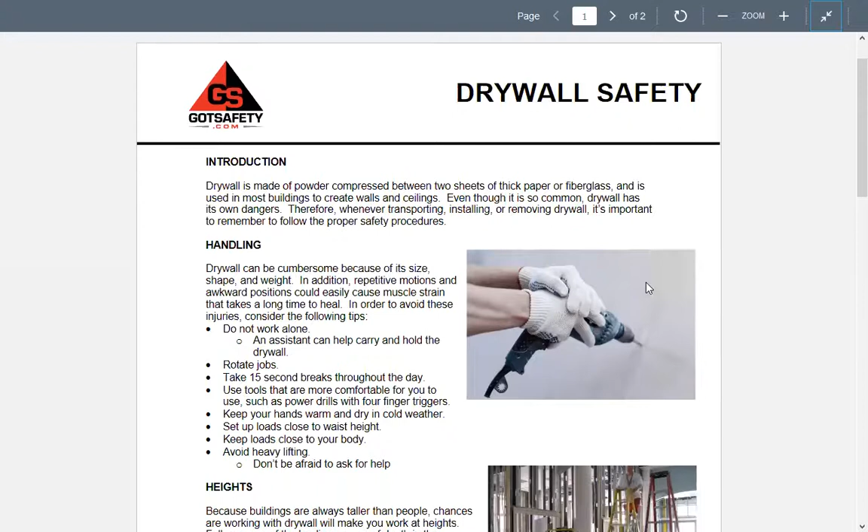Handling. Drywall can be cumbersome because of its size, shape, and weight. In addition, repetitive motions and awkward positions could easily cause muscle strain that takes a long time to heal. In order to avoid these injuries, consider the following tips. Do not work alone. An assistant can help carry and hold the drywall. Rotate jobs. Take 15-second breaks throughout the day. Use tools that are more comfortable for you to use, such as power drills with 4-finger triggers.

Keep your hands warm and dry in cold weather. Set up loads close to waist height. Keep loads close to your body. Avoid heavy lifting. Don't be afraid to ask for help. Oh, you know what? I need my. Oh, maybe I don't. Okay, good one. Thank you. I'm going to go back over some of this stuff in a minute once we get through it.

So, Catherine, would you? I'm just going down the list here in case you're wondering how I'm choosing people, and I'm skipping Jose for now. Circle back to Jose. Catherine, would you read, please?

Heights. Because buildings are always taller than people, chances are working with drywall will make you work at heights. Falls are one of the leading causes of death in the construction industry, so be sure to always be on your guard when working at heights. Properly use ladders, use appropriate scaffolding, and do not do anything foolish because you think it will save time. Don't be a fool. And Jose Landeros, would you read us dust, please?

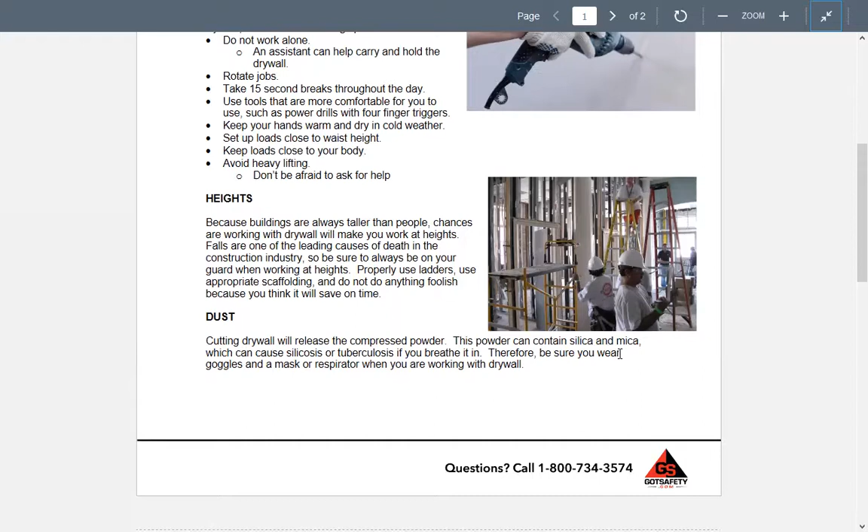Cutting drywall will release compressed powder. This powder can contain silica and mica, which can cause silicosis or tuberculosis if you breathe it in. Therefore, be sure to wear goggles and a mask, a respirator, when you are working with drywall. Okay, so wow. Silicosis or tuberculosis, not good things.

General tips, please. Colby, are you here? Yeah, you're here. Colby.

Cutting safety. Be sure all cutting tools are in good condition and properly sharpened. Dull blades require excessive force, cause sloppiness, and can slip and cause an accident.

Electricity. Electric wires and electrical boxes can be hidden, which poses the chance of electrocution to drywall installers. Be sure power tools are properly grounded. Assume all electrical wires are live wires. Do not use aluminum ladders near electrical wires.

Do not wear watches, rings, or other metallic objects, which could act as a conductor of electricity around the electrical circuits. Housekeeping. Keep walkways and workspaces clear. Keep the floors dry and work with good lighting to prevent accidents.

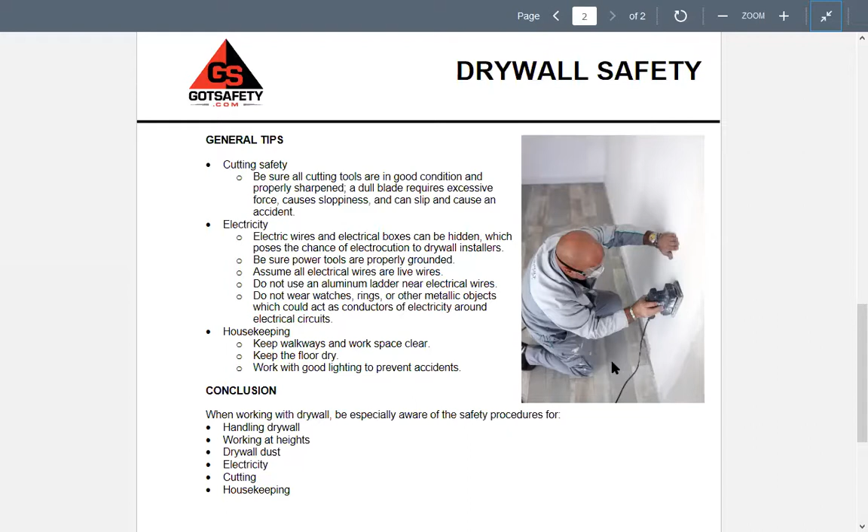Michael Silva, would you read the conclusion, please? When working with drywall, be especially aware of the safety procedures for handling drywall, working at heights, drywall dust, electricity, cutting, and housekeeping. Okay. So, does anyone want to say anything about drywall?

I do, that's for sure. Let's see here. How much does a sheet of 4 by 12 by 5/8 drywall weigh? 70 pounds, huh? All right. 70 pounds. So drywall is pretty universal these days, at least in the United States.

Now, I really don't know how interior finishes are done in the rest of the world. I don't know if there's more plaster or more unfinished walls. We talked about this yesterday in a Zoom meeting with another class I'm teaching for back to work, because we have some people from different countries, like one person from Peru. In Peru, their building techniques are a little different than ours, as well as in Mexico and different countries.

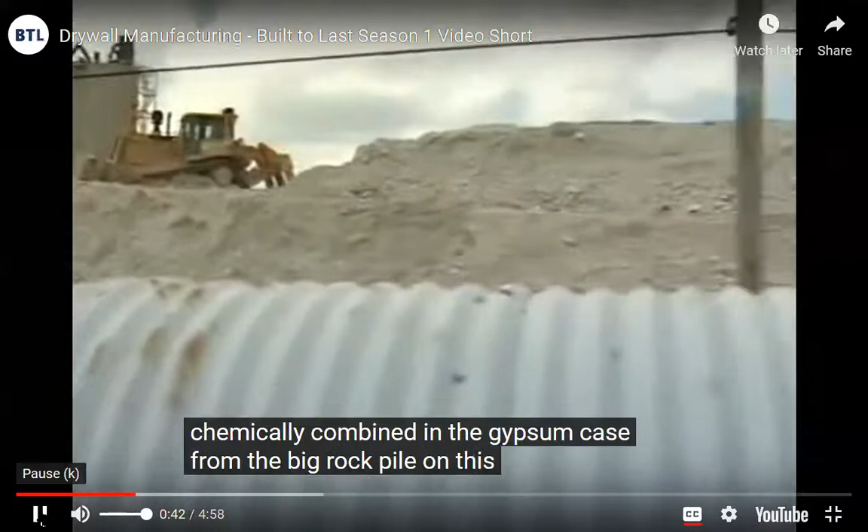And at this point in the process, we have a bulldozer, and he's blending the two to give us a good mix. So we're taking it by this conveyor to the rock dryer to dry off the free water, which is water that's not chemically combined in the gypsum. So it goes from the big rock pile on this conveyor belt. It gets all combined, and eventually it's going to be drywall. Yes.

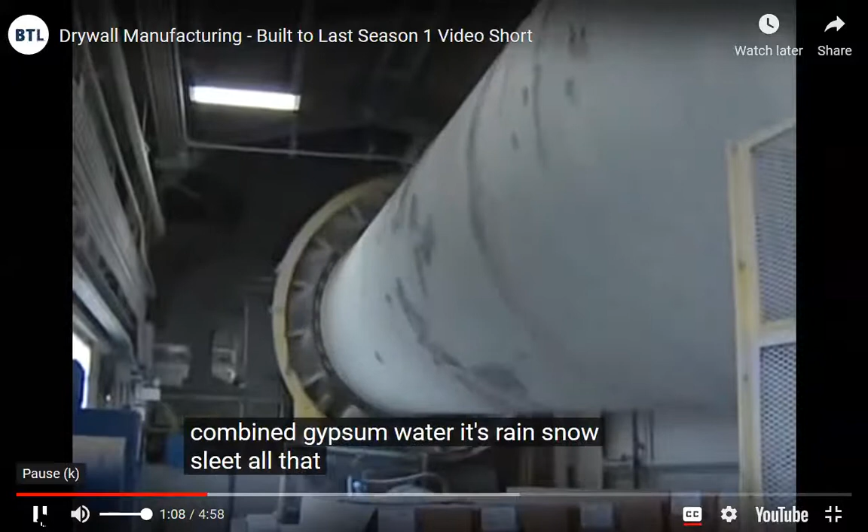Okay, the mixture that the bulldozer just mixed, the synthetic and natural rock, is going into this building. From here, we're going to screen it. We're going to run it through an impactor for the coarse particles to get down to size. And we're also drying it. We're shooting it through a flame to dry off all the free water, which isn't part of the chemically combined gypsum water. It's rain, snow, sleet, all that other stuff. Okay, so the object here is to get it as dry as possible then.

Yes, it is. Okay. The rock dryer is taking away the free water, which is rain, snow, sleet, and we're left with gypsum. Bring it into the plant here, and there we're going to grind it, and we're going to calcine it. That chemically combined water, we're going to take out 75% of it in the middle. From there, it's called stucco.

Now I'm interested in these big spools back here. What's all this material? This is the other main ingredient of wallboard, which is paper. All of our paper is 100% recycled. And these big rolls, we're going to take the stucco, shoot it in between two sheets of these big rolls of paper, and that's the next step that we're going.

Okay, now how come some of them are different? I see green, tan, and purple. That's all the different products. In this plant here, we make every product in the company, which is XP product, which is mold resistant, your regular wallboard for residential, your 5/8, which is for commercial construction, and that's just a different type of products. This is why the paper is different colors.

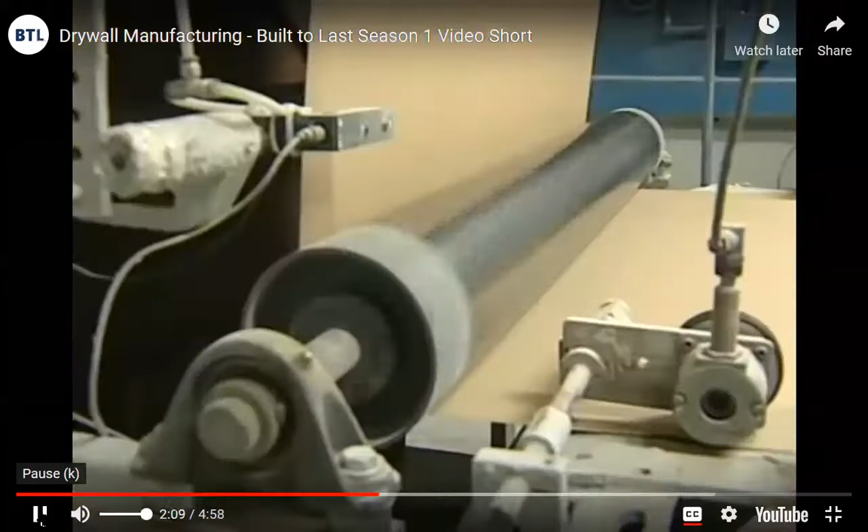Steve, I see a lot of drywall going by up here. So what's happening in this part of the plant? This is where we form the sheet. We take the stucco that you saw in the rock get ground down in the chemically combined water. From here, we're adding water to it, shooting it in between two sheets of paper, and then we're rehydrating the gypsum back in this sheet long enough to go to the knife where it's hard enough to cut.

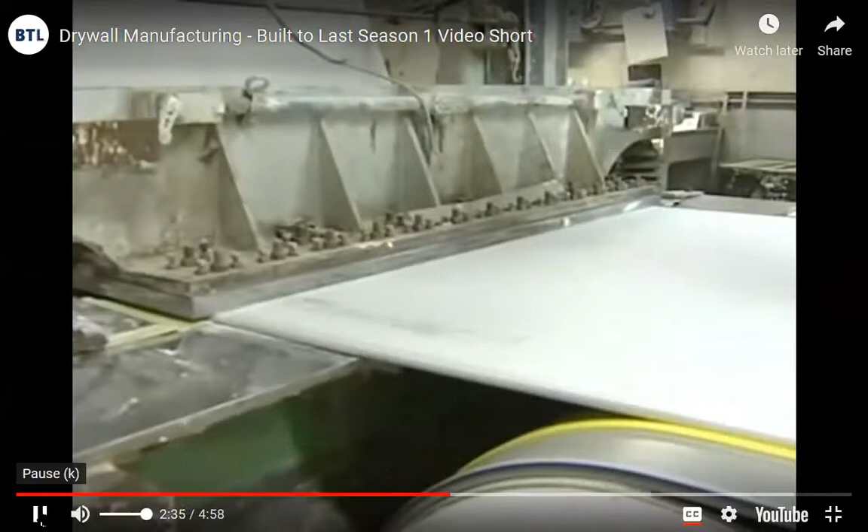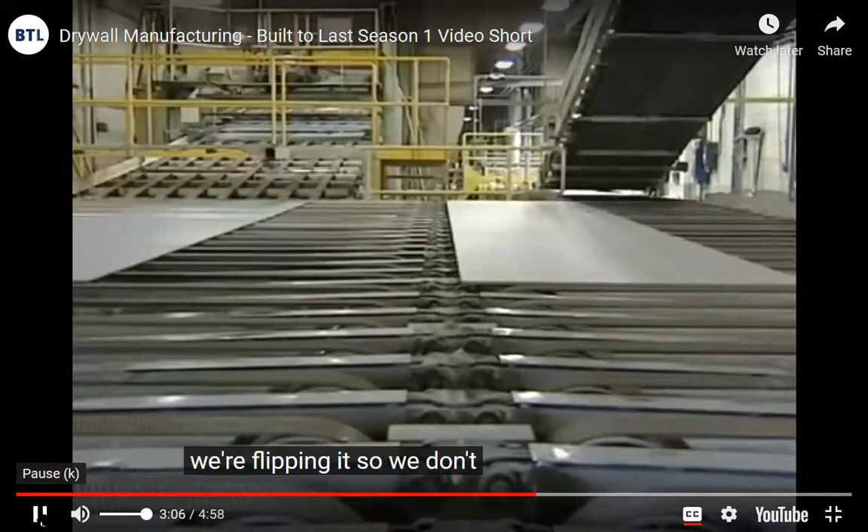Real active area in the plant. So what's happening here? This is the knife area. What we're doing is we're cutting that sheet that we formed at the wet end. It's 800 feet long. We're cutting it to length. We're flipping it so we don't damage the face in the kiln. We're grouping it side by side and loading the kiln so that we can dry the board in the kiln.

Okay, about how many degrees is that kiln? It's pretty warm in here. It's 3 zones, and it's about 550, 550, and then 350. How long does that process take for it to get through the kiln? From the wet end through the kiln is about 50 minutes. Cool.

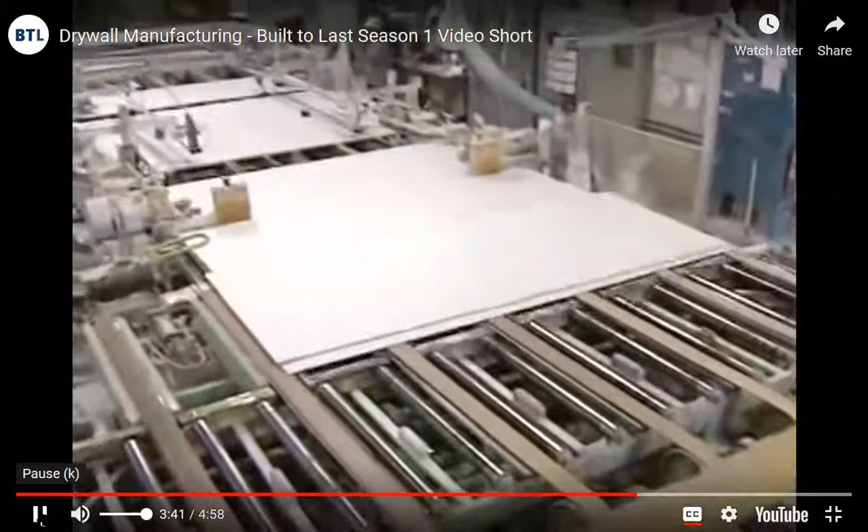And then about this location of the plant, we finish cut it, we bundle it, we put tape on it for our customer, and then we stack it in the warehouse.

So Steve, this looks like your warehouse, huh? Yes, this is where we stock our board after we make it for our customer. We have 5/8 Calcor over here, which is a plaster-based product, shaft wall liner there, regular half-inch wallboards right in behind us for our residential customers. So all of those different variations that you told me about, that coincides with the different colors. Yes, that way the customer and the architect know exactly what they expect for the job is on the wall

by the various colors. I'm glad that you talked about that because it seems with all these different varieties that you have in drywall, you can cover pretty much any need for residential and commercial use. Yes, we ship our half-inch and our 5/8 locally, and then some of the products, we're only one of a handful of plants in the country that run it, so we ship those nationally. Okay, and so from here, it gets loaded onto a truck and gets sent out wherever it needs to go. Yes, that's correct.

Okay, great. Well, thank you so much for the tour today, Steve. It was really interesting. You're welcome. Wow. Wow, wow.

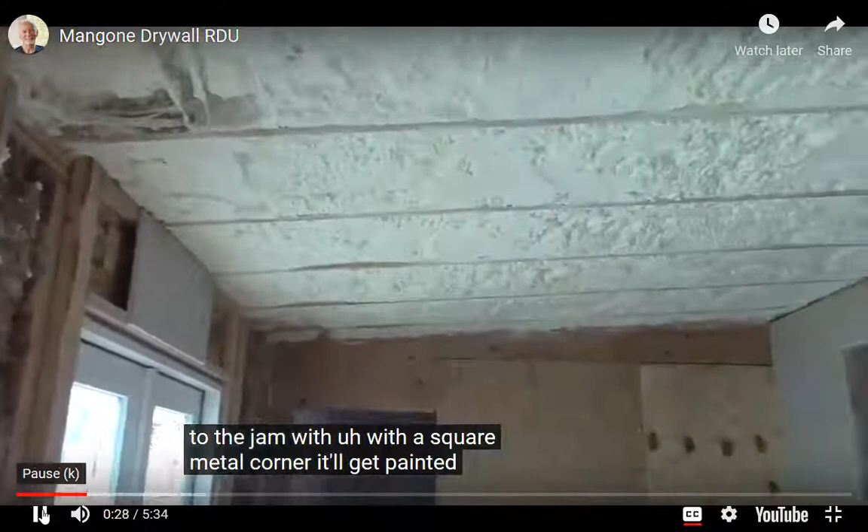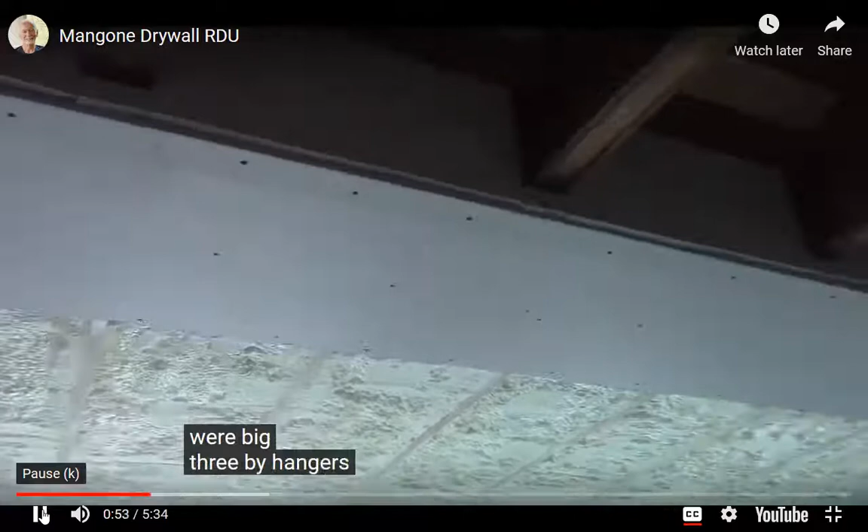There's a soffited ductwork, which you may or may not have seen. It really came out good, and we were able to extend that soffit, that box. Sorry about the noise. So that it completely covered the hangers. These were big 3x hangers that hung on these trusses, because this was the exterior wall, which we removed, put in a big parallam beam, which these site-built trusses are hanging off of, and we were able to box them, pad out, and get rid of the hangers altogether.

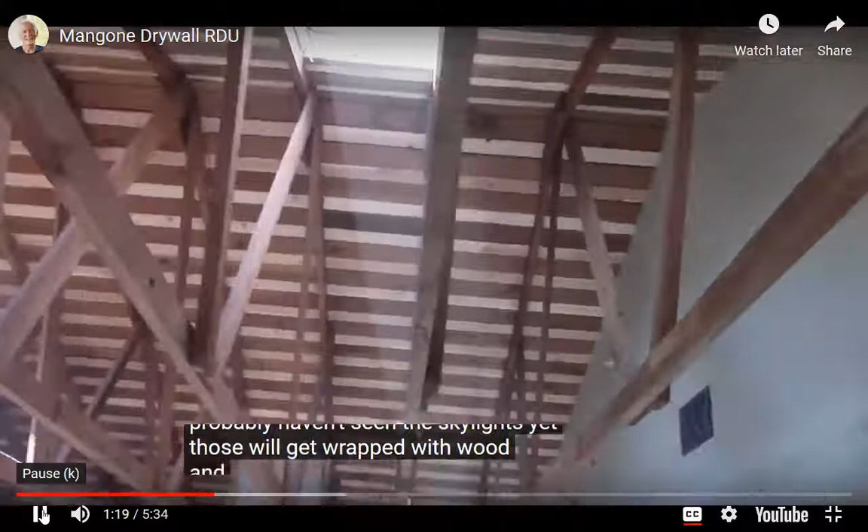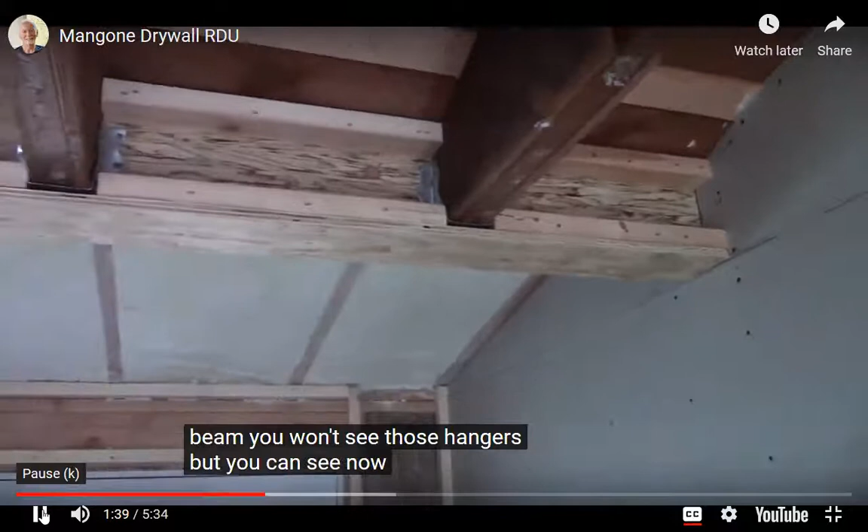Probably haven't seen the skylights yet. Those will get wrapped with wood and cover the 3.5 inches of insulation. These are all drywall, all hung. This has also been padded out to receive drywall to get past the hangers. Get your finger out of there. Drywall beam. You won't see those hangers. You can see now. See those hangers? None of that's going to show. Not one bit of it.

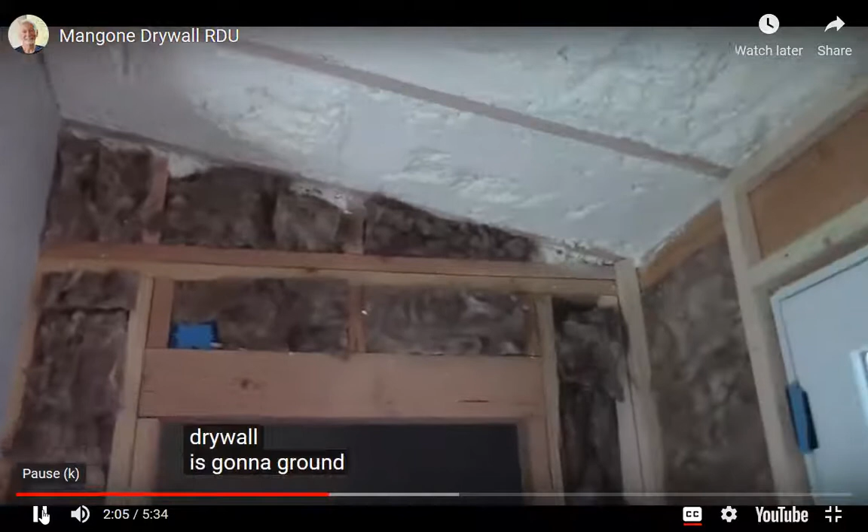This wall is furred out, so we have enough room for the drywall to return into the doors. And we're not hanging the walls with doors on them yet, because we need to get the jambs in, because the drywall is going to ground to the jamb. It's going to return to the jamb with a square corner.

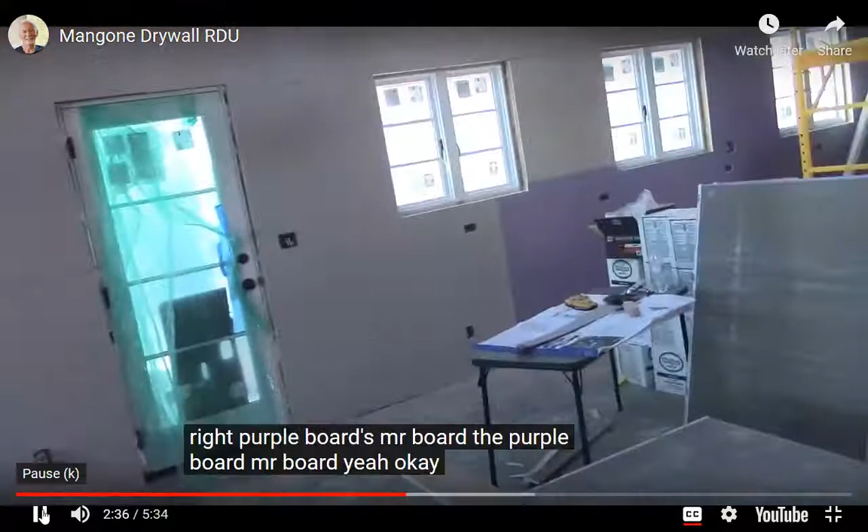The purple board is the MR board. That's moisture resistant. Right? Purple board's MR board? Yeah. Okay. It's nice to have on a kitchen wall, your wet walls, your bathroom walls, anything that's a wet wall. So this got furred out, like I said, so we can do that return. This is a wrapped opening.

Typical drywaller's bench. They're not hanging this wall yet because... no, there's no reason not to hang this wall. Yeah, they'll hang this wall. And they'll hang this ceiling too. Now, these guys are in hanging mode. Yeah, what the heck, man? Get to planning. Cause the door's in the corner and then the oven's sticking out, so. Okay, and you know that's a wrapped opening, right? Yeah.

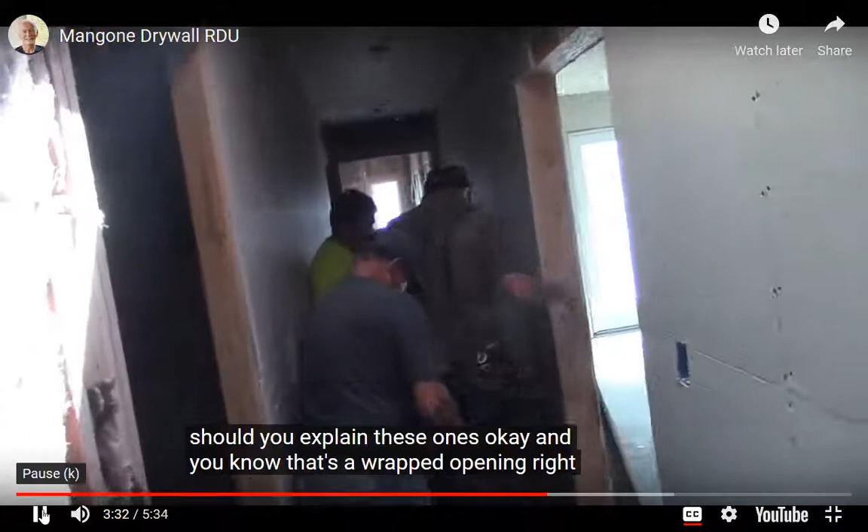There's the edge of it. This is going to have nail-on metal corners. It'll be a nice square corner detail everywhere. Gotta get the jambs in these places. Okay, let's go to the bedroom.

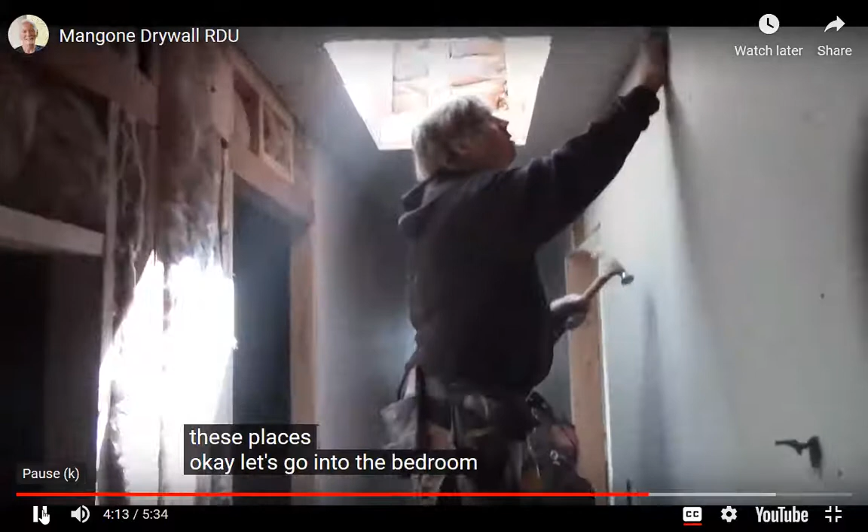Yeah, I tried to do it. What are you doing? He's a movie star. I know he is. No, you guys are the movie stars. You guys are the movie stars.

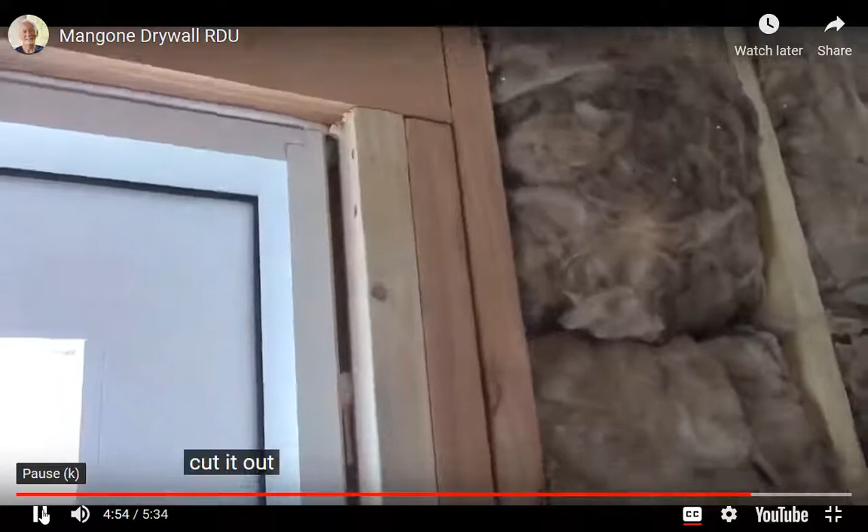All these openings are padded out. Padded out so the drywall will go here and we turn here. Nice square corner. Nice, huh? Very nice. Okay, now I'm not sure what's going on here. I'm gonna ask John about that. Okay, well, there you go. Drywall being hung. And I'll interview Rob Thayer, the drywall guy, so he can talk a little bit about it.

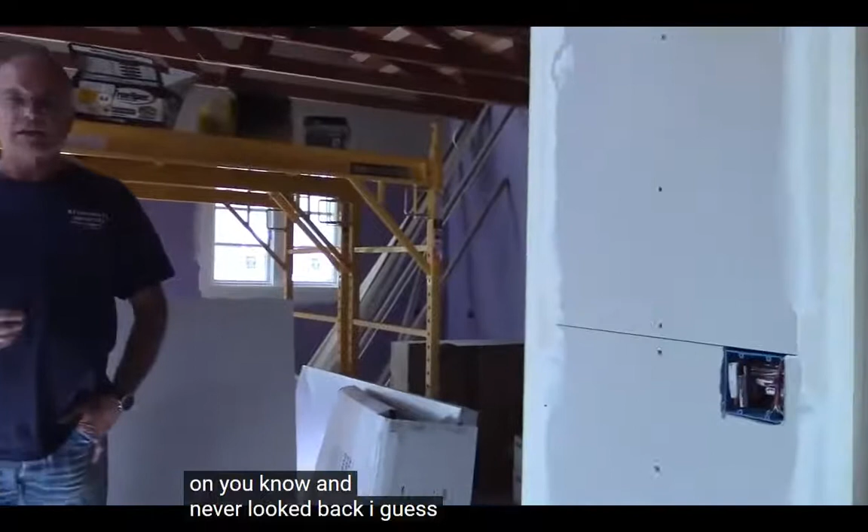I'm one of those guys. I went to college, graduated, came out, discovered I could probably make more money putting my tools back on, and never looked back, I guess. I've been in town since 1979. Seen quite a bit of ups and downs in this town, and that brings us to today. Rob, did you get into hanging drywall purely because it's what your family did? It was kind of a family thing?

No, it developed. My dad wanted to teach his boys a trade. He wanted us to go to college. All three of us did. The reason he wanted us to have a trade is something to fall back on. It's something you always knew, especially me as a kid, and it was the easiest job to go get while waiting for other opportunities, and pretty soon you're just involved in it. It took almost a decade for me to accept that that's actually what I was going to do.

As opposed to using my education, applying yourself and trying to get something else, white collar versus blue collar, and individually learning that being in the trades was more satisfying than I think any other job would have been. Being outside, physical work, the feeling of accomplishment because you get to see what you do at least once a week, if not every day.

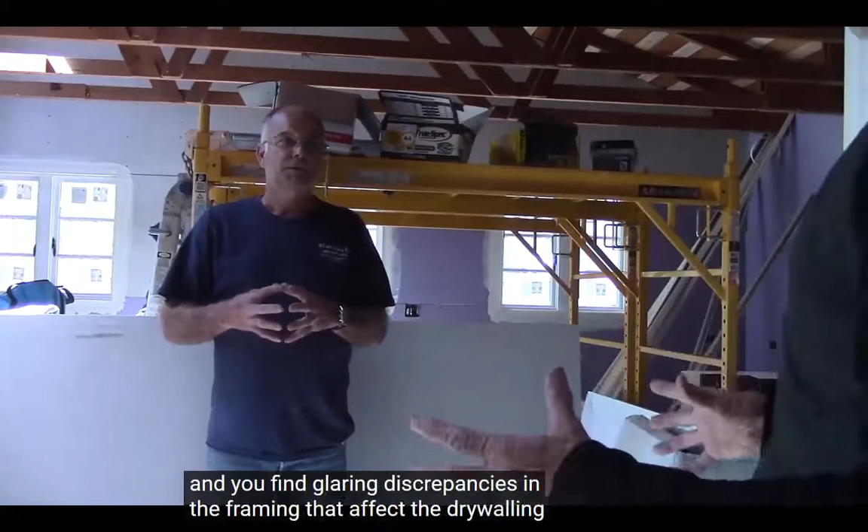It's kind of a rabbit hole to go down, because it's like, who do you keep passing it on to? Okay. Right. So somebody along the way has to be policing the job to ensure the next guy in, and then those tolerances and limits have to be established. Or yeah, and it seems to me that if you're doing the job the way it's intended for you to do it, and you find glaring discrepancies in the framing that affect the drywall, it's time to alert whoever's in charge of general, and let's work together and get

this fixed. But also, I'm willing to do a little bit, but I'm not willing to spend a bunch of money because I bid it for X. I'm doing it at a fixed price. Right? From a subcontractor, yeah, absolutely. And it's only fair. There's nothing unfair about it. Right. Because we're working with, like you said, wood that's imperfect. Well, the assumption is that the trades before you did everything they were supposed to do.

Even us, good example, raw door jamb, maybe we leave the job, drywall's sticking an inch past. Well, we don't expect someone to cut that off. We should do that. But occasionally it happens. So if the door guy does it, no harm done. But if we're doing it constantly and that's kind of our MO, that's something that we should be called on and forced to correct.

Well, when I started, everything was nailed. Everything. You had maybe a pocket door that, like my dad, we didn't have a screw gun, we had a Yankee. The old screw Yankee thing. Who even knows? Right. I'm going to stop the recording and show you guys the Yankee. None of you know what a Yankee drill is.

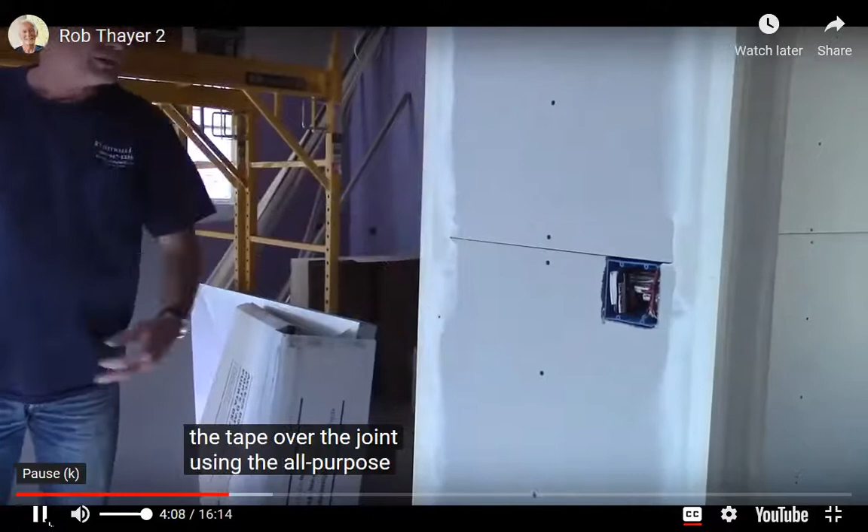There's a joint in the wall, and you embed the tape over the joint using the all-purpose. That needs to dry. So that's your first day, or the first step. And then generally, anytime you're doing any drywall work inside a house or a finished area, there's usually a minimum of 2 coats.

First coat, second coat. So that would be a first coat over the tape, and then a second coat over the first coat, and each coat goes a little bit further beyond and feathers the edge. Okay. So when you say feather the edge, I think what we're talking about on this particular joint is that tape's about 2 inches, right? Tape's 2 inches wide. So 2-inch mesh tape comes across this joint, and then the mud goes on it, and the mud goes on either side of it.

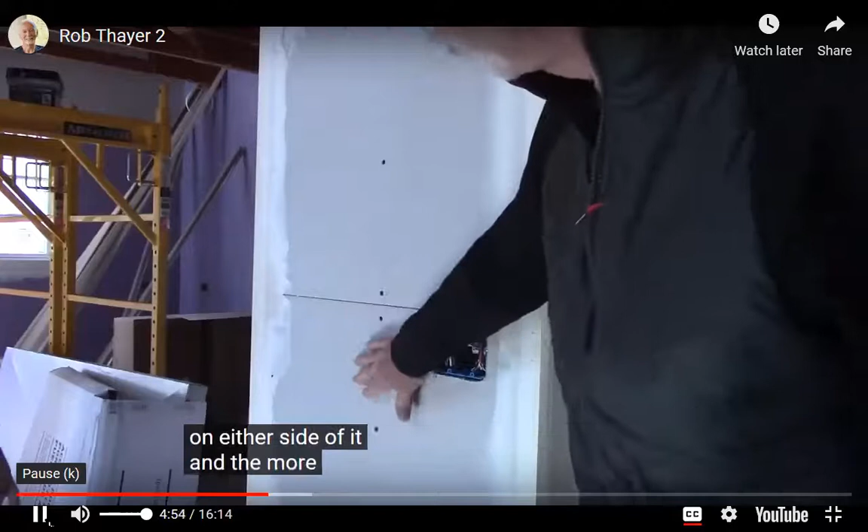And the more mud, so the sand in between. Yeah, okay, this is a good example. This is a recessed joint. By the way, stopping you right there, that's how drywall is made. Drywall is made on the edges, it flares in. So here's a piece. This is a 4x8 sheet, 1/4 inch. It comes from the factory like this.

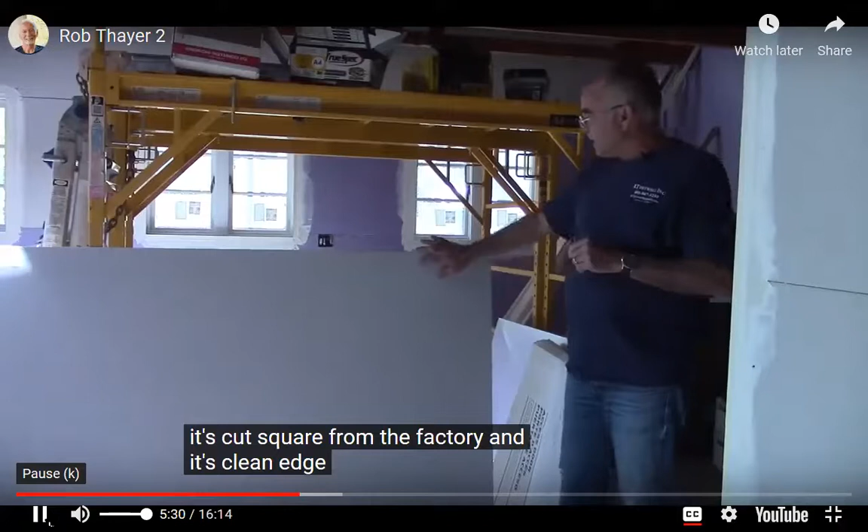So we call this a butt joint. It's a factory edge. We call this a factory butt joint. It's cut square from the factory, and it's a clean edge. Almost always the long edges, we call them recessed edges because there's a little recess here. So this is a 1/4 inch, and then there's a little recess, less than a 16th probably, but let's just call it a 16th. And this is wrapped in paper, and it's glued and sealed on the backside. So it narrows. So yes, and so that's what we have over here.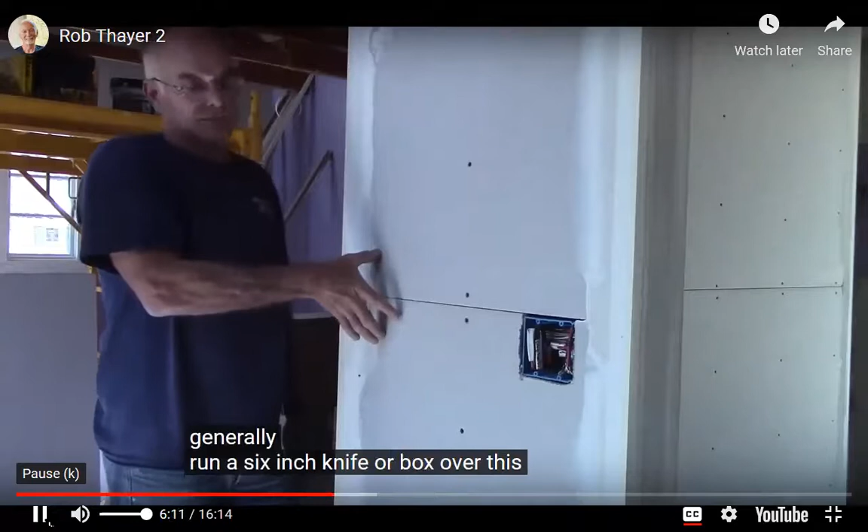So this is where the tape goes, and it's recessed so you can embed the tape and get close to this flat plane. Right. So after that's taped, next day after it dries, you would generally run a 6-inch knife or box over this. Feather the edges, see this edge here is feathered. Feathered so thin down. Yes, as tight as possible. Okay, that dries, that's the first coat. It'll need another coat, second coat, a little bigger knife, let's just say an 8-inch or a 10-inch knife. Again, to cover the 2 edges, feathered, and that's the second coat.

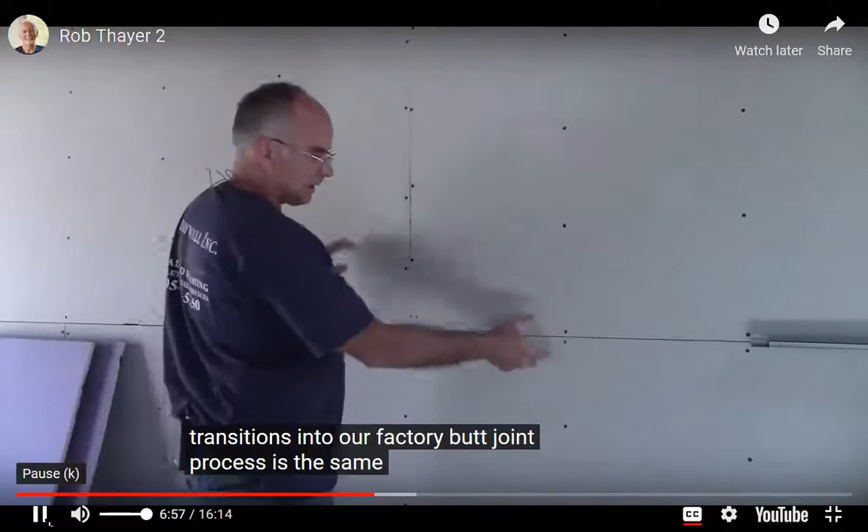Again, that dries. Now, aren't you mudding the nail holes in the first go around as well? Yeah, you want to spin and look at this wall? That's a much better wall. Okay, so here's our recessed joint, it transitions into our factory butt joint. Process is the same. The only difference is this joint has a recess, this joint has no recess. So how do you get that joint? We'll get there. Okay, so we've done 2 coats here. The same process is here, but a little bit different on the coating.

So since this is a butt joint, we do tape it the same. Okay, but your first 2 coats would be here and here to create the feathering on the side of the tape. And then we've created somewhat of a recess in the middle. Yeah, I didn't know that. That's first coat. Now the second coat obviously would be again here or here. So you're filling the middle and then you're going to hit the 2 sides. Yep. Okay, second coat. Now the same thing with the screws. You're going to first coat it. It's going to dry. Does that happen when you guys? Generally, it happens when you're first coating here, you're first coating here.

So the key for efficiency on taping is trying to keep the whole project in the same circular process. So you don't want to have second coat, first coat, finish coats all going on at the same time. You want to keep the process continuous. And I would imagine you want the absolute minimum amount of mud to do the job rather than more mud than you have to sand off. Yeah, because here's what we're going to get to now with the second coat. What a skilled tradesman will learn over time is how not to crown the joints. If you start crowning, that's where the shadowing in the house, the lighting will start showing, and they'll highlight right out, and you'll see little bumps, little crowns.

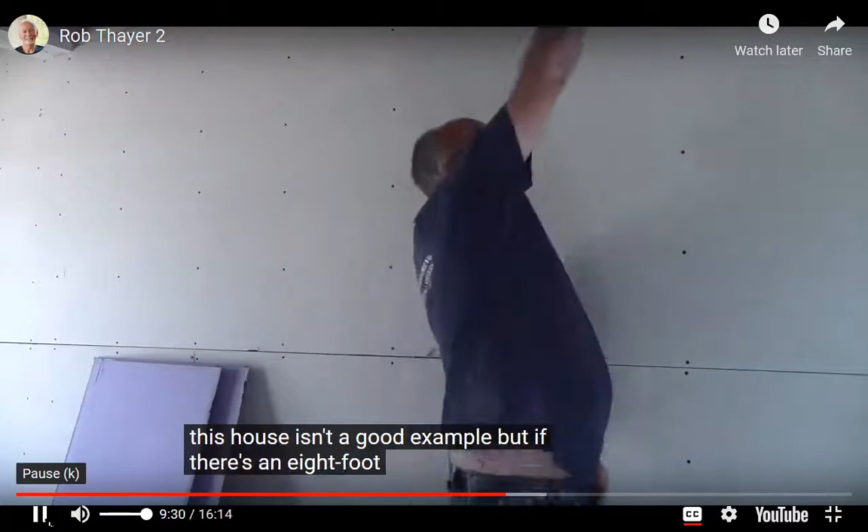We call it troweling out the joints. So that third day, you'd be troweling out the joints. You might be doing a little touch up, and this house isn't a good example, but if there's an 8-foot ceiling here, there's going to be an angle here. Now this angle, we have tools, we call them angle boxes. It gets hit when it's already taped, just like that, just like the embedment. And so generally we trowel out the butts and run the angles on that third day.

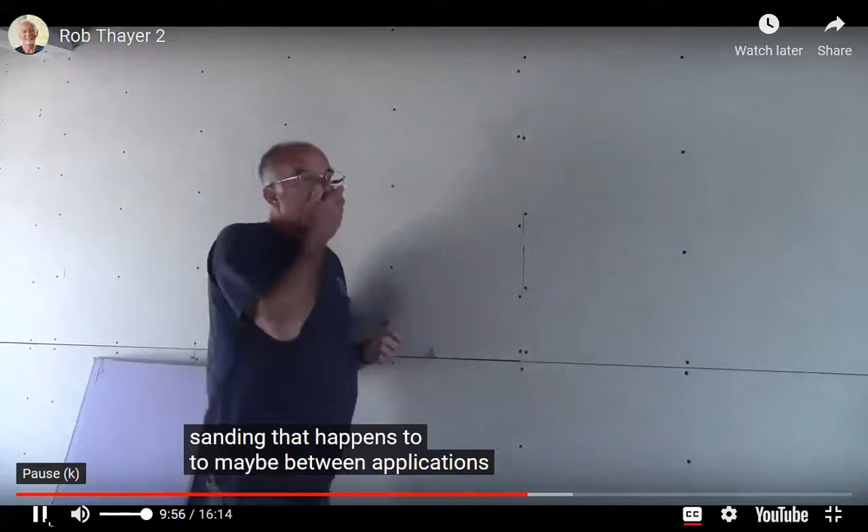Now, after that, it's all dry. There's some sanding that happens maybe. Do you sand in between applications? Well, you can. You don't have to, and that depends on the talent of the taper. Right. Because that's your whole goal over time with experience, to continually improve to where there's less and less sanding. Yeah, less and less work, less and less man hours of people touching the same part. Right. A good taper can get all the way to this process without any sanding.

There might be some brush down because you'll have foam boogers. There might be a little blob or something that needs to be knocked off. But generally, everything we use is sandable. So any mistake we make, you can sand it out. So the more you're limiting that, the more efficient you are. Okay. So there's generally some brushing down, sanding, just to take off some of the edges. And again, it depends on the finish texture.

Skip and smear. Skip and smear, there's hardly any sanding because the texture itself is so heavy, it almost looks in places like it's not sanded. So generally the lighter you go, the thinner the texture, the more sanding there is. So a glaze or a level 5. A level 5 is the ultimate smooth. We can get into textures if you want, but level 5 just means that all the surface area is skimmed with a thin layer of drywall compound. Okay. Level 5, that's Cadillac.

It's counterintuitive, but the smoother you go, the more work it takes because you have to take out all the imperfections. Even though we're starting smooth, you think, well, I don't have to do anything to that, but you do because the drywall mud itself has a different paint absorption than the paper. So you want to make one skin, so when the paint goes on, you don't get the phenomenon we call flashing. Everybody's done everything correct, but the paint acts a little different between mud and paper. So level 5, the theory is a complete skin of compound. It's all one surface, so everything should work the same.

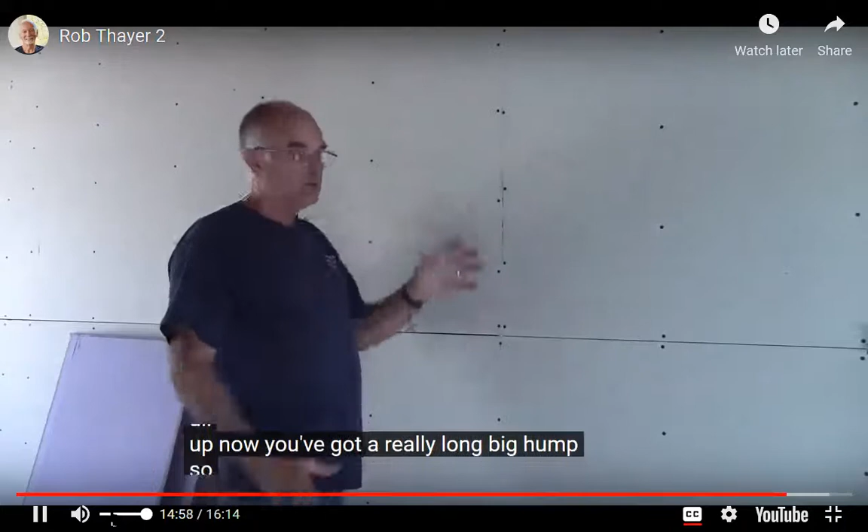And part of the reason for that is finish. This is a more difficult joint to finish and it's going to finish wider. You're going to create a little bit of humpage in here, and that's why we go wider, to flatten out the hump. If you line that all up, now you've got a really long big hump. So stagger them. Structurally, it's better. I'm not sure, it could even be a code thing. I don't know, but it's just a common practice to stagger your joints.

What are the tools? What's a drywaller going to have now? Well, back to what we talked about in the beginning. In the beginning, it was just a knife, a circle cutter, a saw, and a hammer. Okay, a tape, knife. Okay, so yeah, the rasp. My dad always called that an apprentice cheater. A rasp can be used at times when it's necessary, but the more skilled and experienced as a journeyman you are, you don't need it, because everything you can do with a rasp, you can do with a knife. It just takes a long time to learn it.

So what's the process of cutting drywall? Just because some of the people in my class will not know how drywall is cut. Can we have you cut a piece? Dale. I don't know. Oh, wait. Here we go. Okay. Now this is where this guy's expertise, this next thing you see, is so amazing to me.

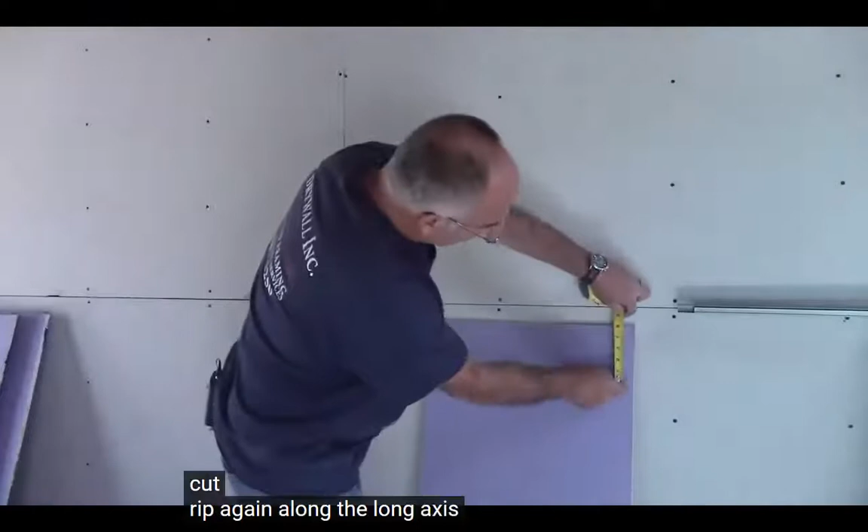Okay, so 2 types of cut. This is a rip cut. Rip again along the long axis. You know, just a 6-inch rip cut. Okay. You just did that. I gotta zoom on that because I don't think anybody can even see what you did. You don't have a straight edge and everything. You're using your hands. Magic.

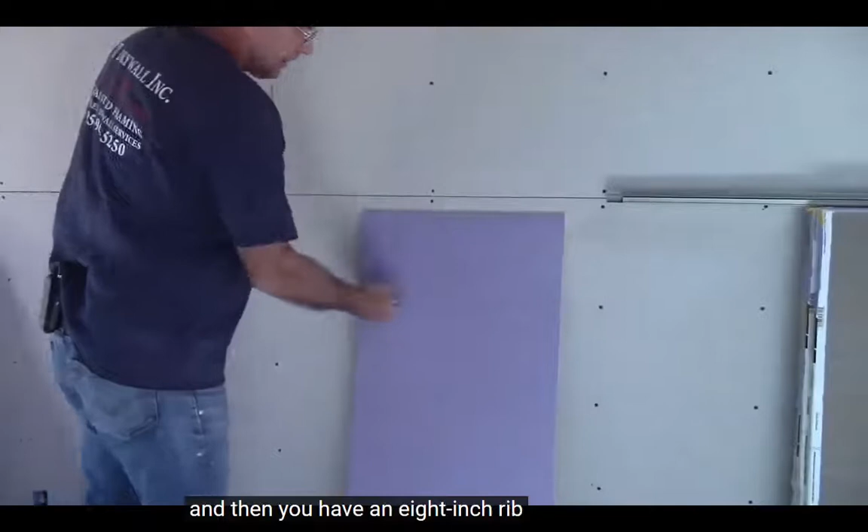Your tape measure. So again, if you want, okay, so that's 6 inches. So if you want 8 inches, you put the 8 and you lock it in on the edge. And again, this takes time. It does take a skill set. And then an 8-inch rip. So what Rob just did is he scored that sheet. Yeah, you're basically cutting through the paper, maybe a little past the paper. Especially the smaller you get, you got to go a little deeper.

Okay, so these are rip cuts. Basically, rip cuts are some of the easiest to break. Once you score it, you just need kind of a positive, negative pressure, and it'll break right at your score. Now, just a quick thing, if I had cut this one a lot deeper than this one and I did that same pressure, it probably would have broken there instead. Okay, so it's cut. Again, with the rip, it's easy to snap now.

So you didn't even come and cut from the backside? You don't cut from the backside? Don't have to. Sometimes you do. You have a cut, break, and then cut from the backside. You learn over time when it's necessary. But you saw the way that broke. Oh, I can feel it. Especially with a rip cut. Rip cuts, again, they break a lot easier.

Okay. End cuts or butt cuts, this is a pretty small piece. Basically, it's the same thing. Now, I'm going to do this without a T-square. A full sheet, you can put a T-square on it and do the same thing. But this is basically factory edge. You got a good straight edge. Easier on the finger. Rough edge, a little rougher on the finger. You can still do it. So this is an end cut, butt cut. They're cutting something off the end of the sheet. Same thing. We'll go 6 inches.

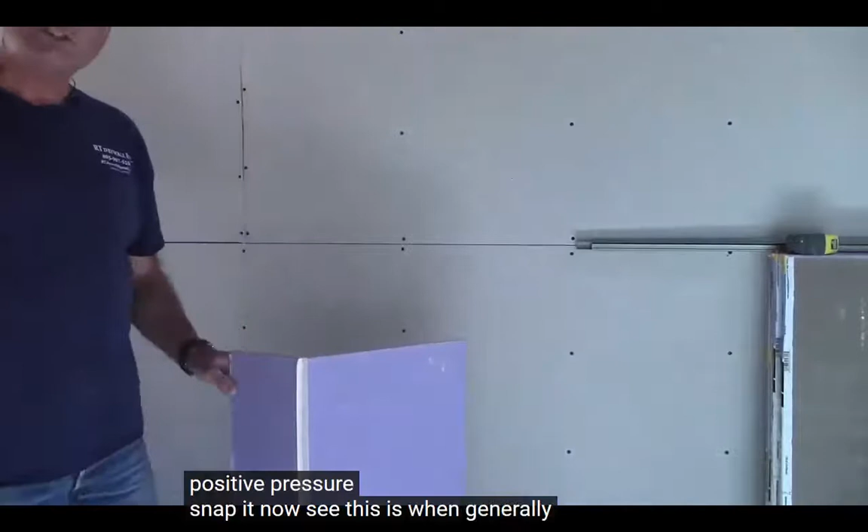Oops. Sometimes you go over it again, following the same groove. Now, see, these are a lot harder to break, especially since it's a small piece. If it was a big piece, I'd probably get back here. And again, it's negative, positive pressure. Snap it. Now, see, this is when generally you'll want to cut the back. You don't have to do 100% of it, but you got to do enough to relieve the pressure of the paper holding it together. You can cut it from the back, or you can score it from the inside, and then it comes apart.

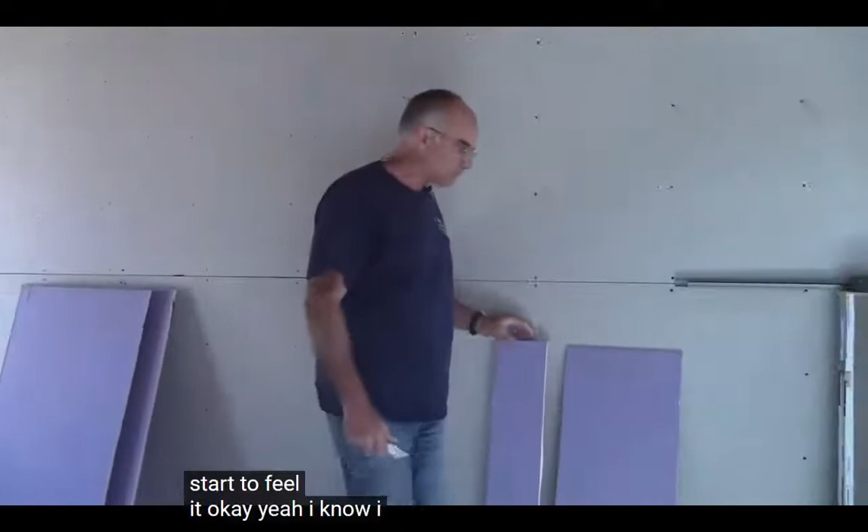Again, doesn't work that clean every time, but you learn that over time. It's just like any trade, you start to feel it. Yeah, I can see that. As a carpenter, we don't get to do that. We score and clamp and get our guards out of the way and all this stuff, right? Not only do you not have to use saws and stuff like that, you can use your finger and a tape. Sometimes the drywall hanging part's more like playing horseshoes. You just gotta get close. Taper's gonna fix your mistakes.

So, woodwork, the tolerances of especially finished woodwork are so much smaller. You can see a 64th of an inch pretty good, but an 1/8 inch crack in drywall isn't that big of a deal because it tapes. Fills with mud. Now, a 1/2 inch gap is too big, but still our tolerances are a lot different. Another thing that you're able to do that has really helped me out is, ceiling walls are almost never flat straight, and a lot of times not plumb either.

Ceilings, whether they're level or not, that's an issue as well, but they have a lot of waves a lot of times. They're not flat and straight. You've got to put things to them like crown. So, correct, a lot of times we've had you guys come back. Correct. And pull and float.

Float it. We'll have crown molding where it'll touch on this side and it'll have a 1/2 inch to 3/4 on this side. Correct. And after building up, you'll be able to pull that. So you don't have the perspective because your eye's not up at the ceiling to see how you've done that. And yet from here, yeah.

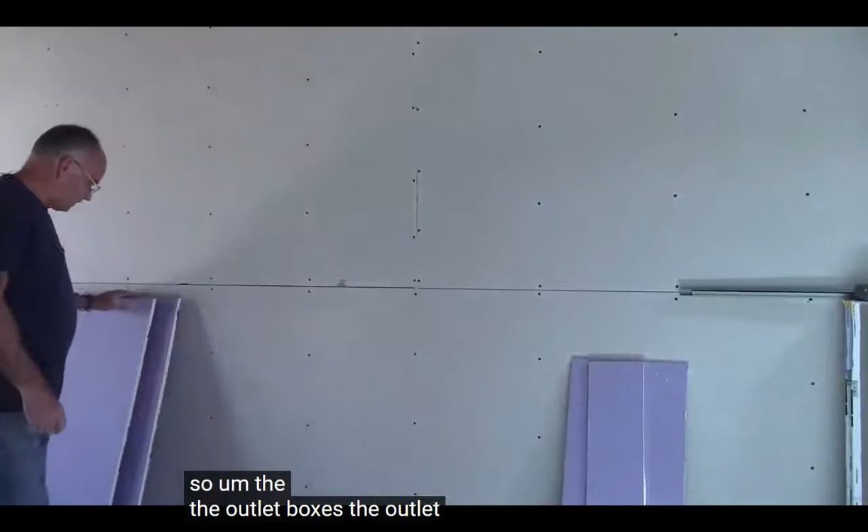The outlet boxes traditionally were always cut out with the knife, measured all four sides, penciled in, cut out, sawed out, knifed out. But now 99% of them are cut out with a router. They're just marked. You cover the wall, tack it lightly, the box is underneath, the box is marked, and then you go around the outside edge.

Dale, you got a router real quick? Other than that, the basic hand tools have kind of stayed the same. There's a little short keyhole saw. Here's a keyhole saw. A lot of guys hardly use this anymore because this has taken its place. It is still used by a lot of old guys like me.

Then we have a big saw for cutting big pieces, but still the router's used 99% of the time. And it's just a simple router, a roto tool with a drywall bit on it. Do you need a hole to bring it in there? You can just punch it right through. It'll go right through.

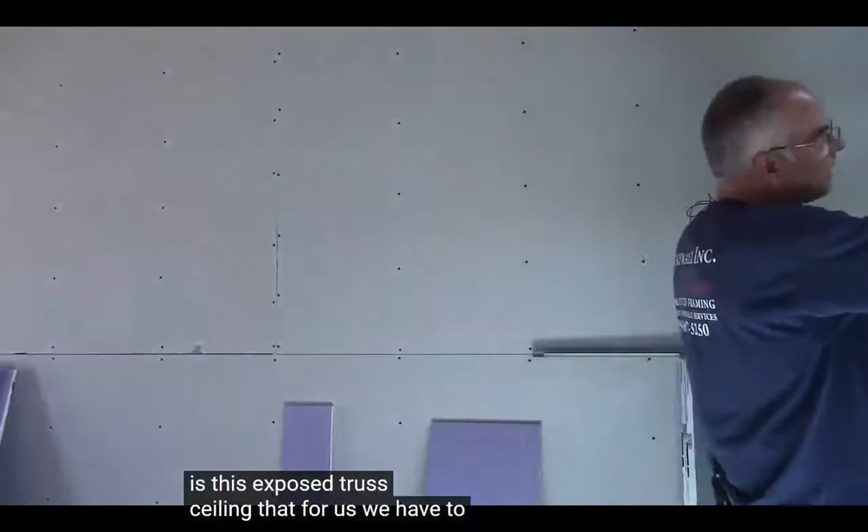Any particular challenges that come up on this job or another job? Nothing that stands out. The only thing really different about this job would be this exposed truss ceiling that we have to cut around and finish tight around all the truss work up to the roof sheeting. Other than that, it's a pretty standard house, but this room here is kind of unique for residential. You don't get this look much in a residential.

Now, as I remember drywall hanging, you guys hang the lids first. Generally, you're supposed to. Does your wall support the edges of your lids? Yes and no. You just start with the ceilings and work your way down. The gaps around the edges of the ceilings are covered by the wall sheet. So if you do your walls first, you got to have a nice tight fit on that ceiling sheet, and you're losing your backing capability because you've already covered up some of it. Think of a 2x4 wall with a 2x6 plate on top of it for backing on each side of the wall. Doesn't leave you much on each side.

So if you do the ceiling first, you've got enough, but if you get your drywall on the walls first, you're going to take up a lot of that wood. You just start on the ceilings. Sometimes, in a rare condition, we would do the wall first and the ceiling afterwards, but very, very rare.

So how many sheets on this job? I'm trying to remember, it was stocked with maybe 90 4x12s and 20 something 4x8 green board. Looks like there's some extra green board.

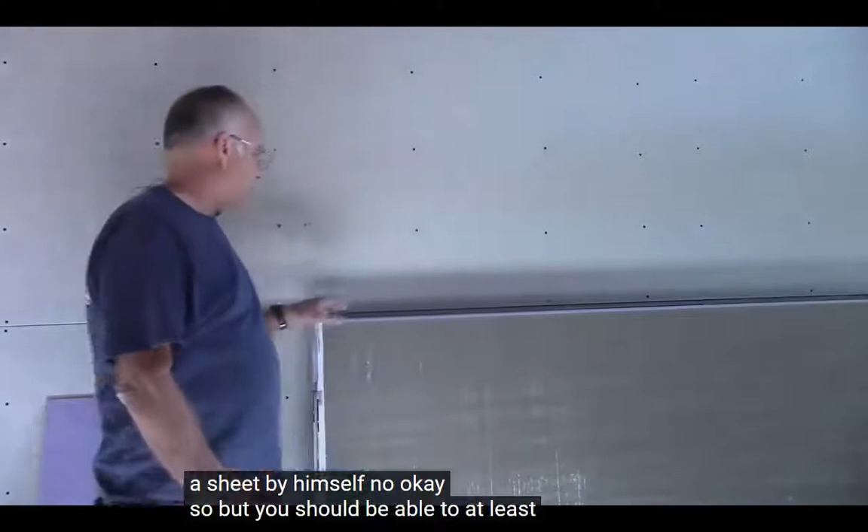Now, does one guy hang a sheet by himself? No. But you should be able to at least pick up an 8-foot sheet and install it yourself without a partner on the walls. Now, ceilings are a different story.

All ceiling work takes 2 guys unless the piece is small enough to handle. Did you start on the walls with the bottom and then step the top? It depends. If it's an 8-foot room, you start from the top down because you want to leave the crack at the bottom. Okay. So most 8-foot rooms are rough framed in at 97 inches. So you're going to put some drywall on the top. So you're still going to have, you know, a 1/4 inch to a 1/2 inch gap. And you want that on the bottom.

And then we have a tool, it's called a kicker. It goes in and it's a lifter. Okay. So other than that, it depends on the room. Obviously, these rooms, you start on the bottom and stack them up. Okay. So different journeymen do it in different ways. Personally, I like starting with the hard, heavy, nasty stuff first, get that out of the way, because you always feel best in the morning. And then later in the day, you're not doing the heavy lifting.

That's a good point. And that takes time to learn. And then you have to be able to read the room and figure that out. And it just takes years. And the learning process is highly dependent on the teacher. You know, if you're being taught well, you'll learn well. But as far as getting in the drywall trade, you really need to have an interest in it. You can't be afraid of hard work.

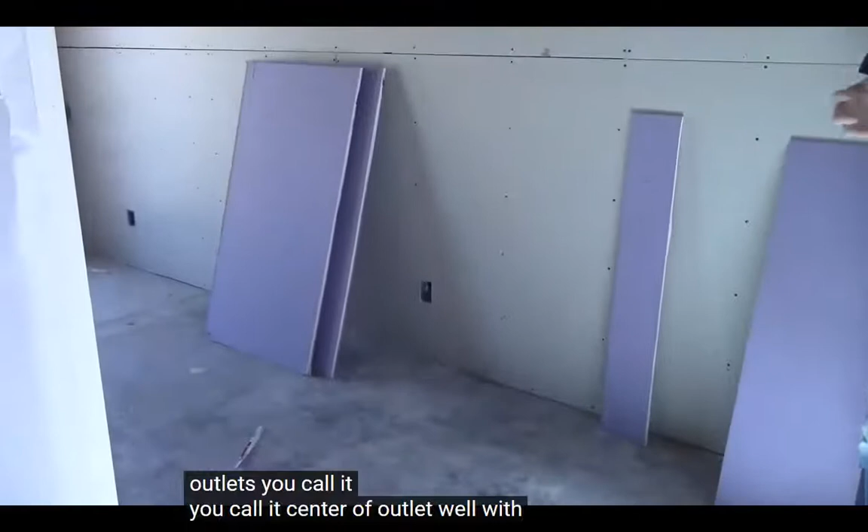Well, with the router, you just gotta mark somewhere in the middle. But back in the day, you'd have to actually measure it. So let's say you put your top sheet up, now I gotta measure down, I gotta know where it is. And then you learn what your tolerances are because there's always movement in the wall. You think it's square, you put it up, it's not quite there.

Dude, that looks like it grew there. Well, that's cut out with the router. It's a router cut, so it goes right around the edge. Put it up to it and then route around it in place? Generally, the sheet would be tacked on so it doesn't move. There would be some kind of mark, and you can see where there's a pencil mark on it. So the mark might have been right there.

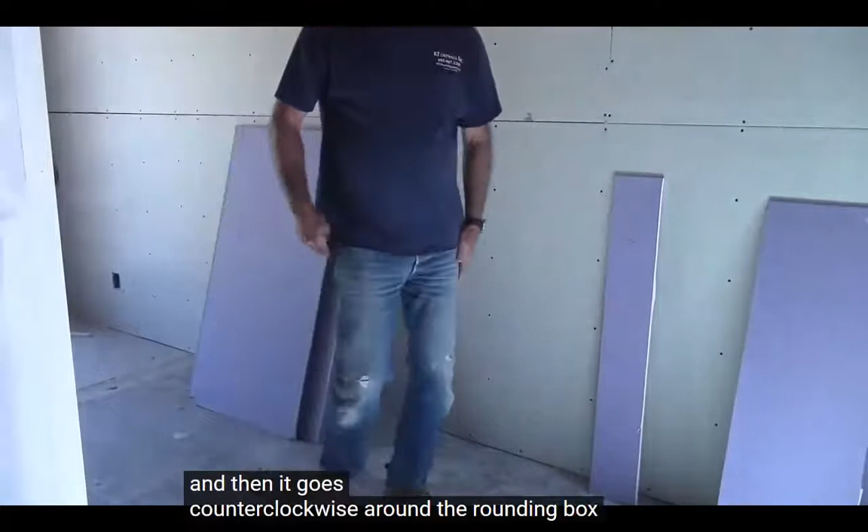Router goes in, you pull it out to find the edge. You find the edge, you come out, you go in, and then it goes counterclockwise around the box. So he's actually routing out around the box. So that's why it's so tight. I'm gonna throw a tape and measure and transfer that. No, and it's a skill. You can get wild with the router too. The good news is if you slip, it's not like a cherry wood door where you just ate the door. It's drywall.

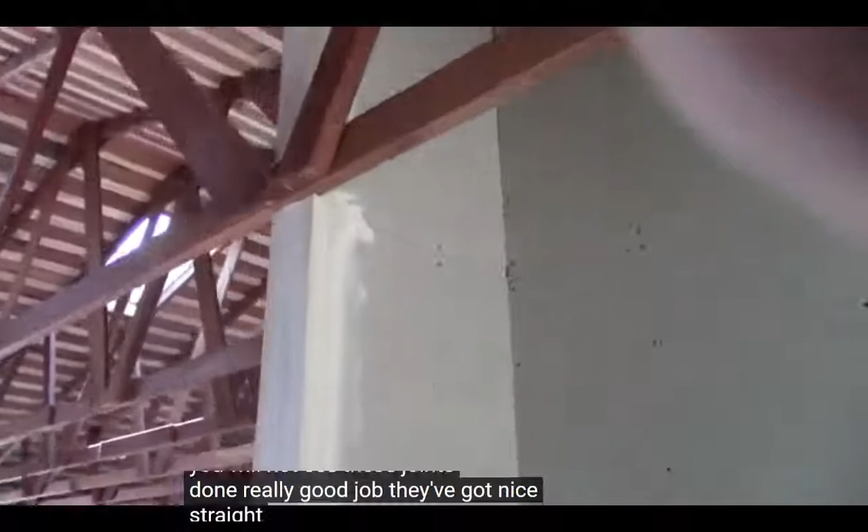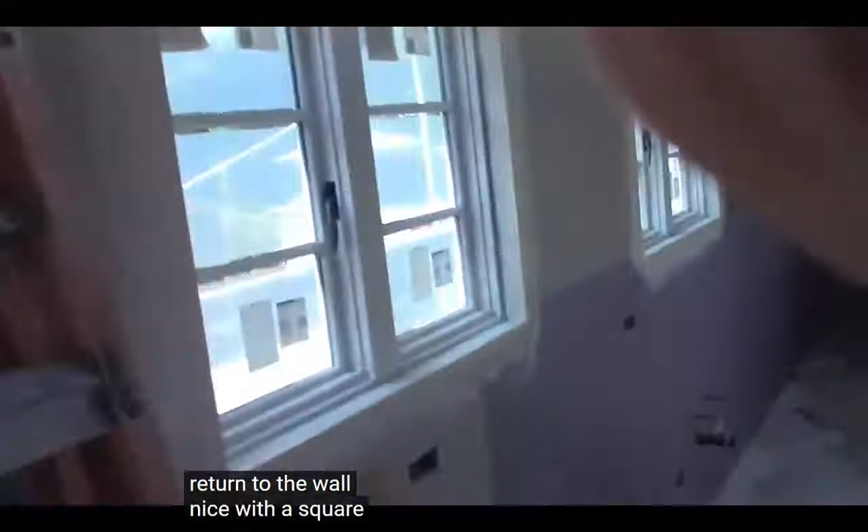Really good job. They've got nice straight edges on the corners, but we don't have to do any casings, trim out of the doors and windows, because the drywall guys are doing it. In our thick wall conditions, we've got a return to the wall with a square edge, very clean look, showing most of the jamb off. Really looks good. This is Dale, unbelievable drywall hanger.

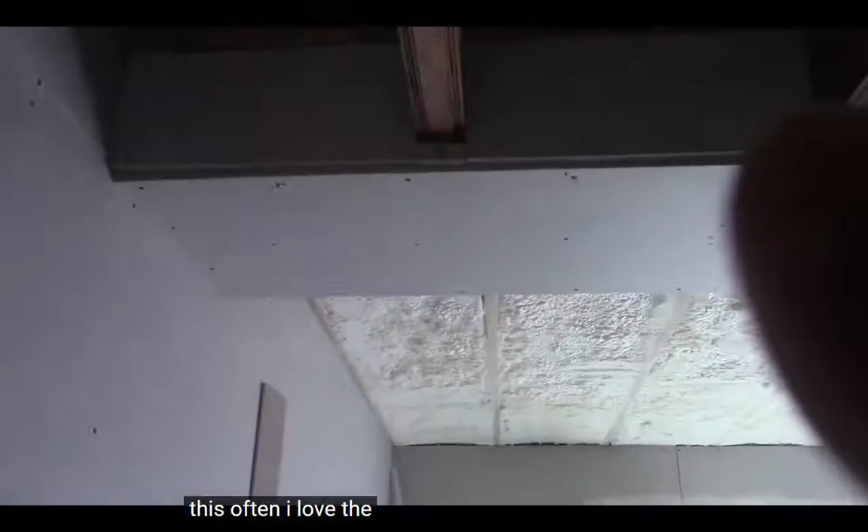This soffit, I love the way this came out. This soffit, if you remember, chases the ductwork.

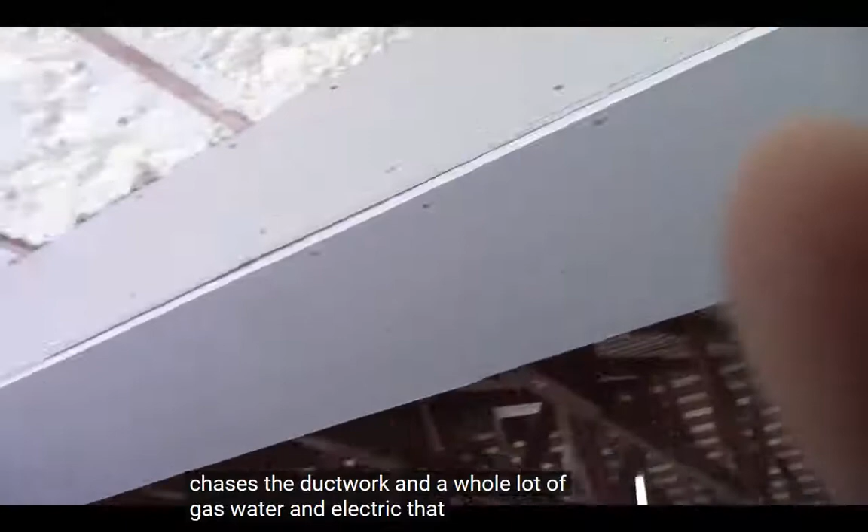Chases the ductwork and a whole lot of gas, water, and electric that makes its way from that side utility room across to this side of the house over here. Get that finger out of there. Go in right now. Here's a recess that's created for the TV that John framed yesterday.

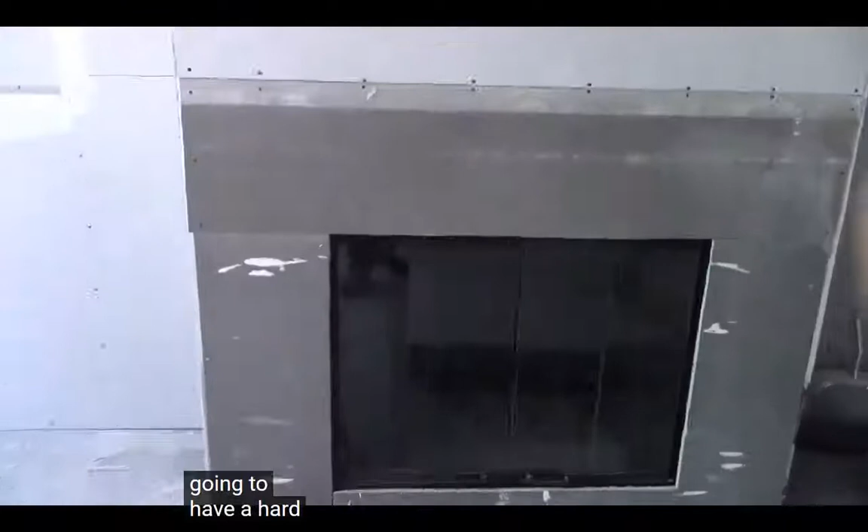And this is going to do this really clean look around the fireplace with just a hard metal edge. And this is cementitious board because we need non-combustible 12 inches above and 8 inches aside minimum around fireplaces that burn wood. Gas fireplace is a different story altogether. None of those regulations I just said apply.

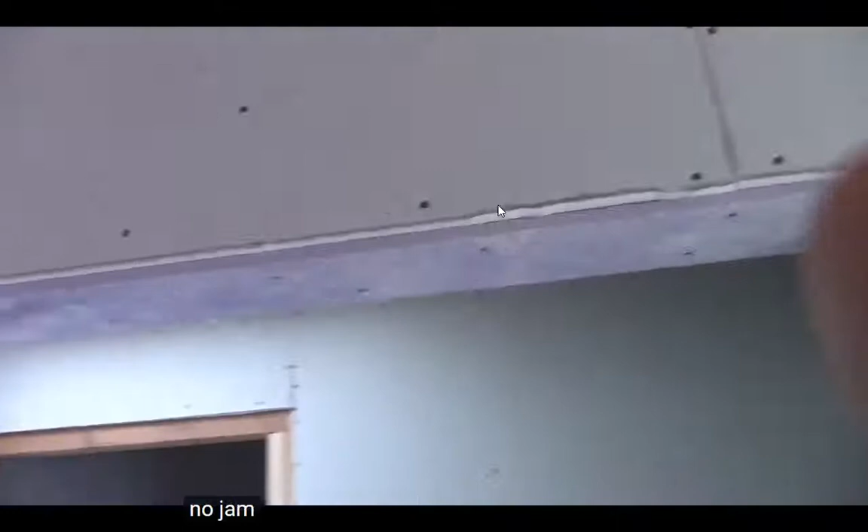We were leaving these trusses, as you all know. This is a wrapped drywall opening. This gives corners. No jamb. And there's no reason for using MR board or green board in that opening. They're just using scrap that they've got. You can use MR board in place of drywall. There's no penalty whatsoever. These get jambs.

But conversely, in a wet area, you want to use MR board. So the opposite is not true. You can use MR board in dry or wet areas, but you can't use regular board in a wet area. Doors, and we're waiting on the doors. Skylight well and drywall. Waiting for the jambs and doors and no casings. Oh yeah, you guys got this worked out perfecto. What a good idea.

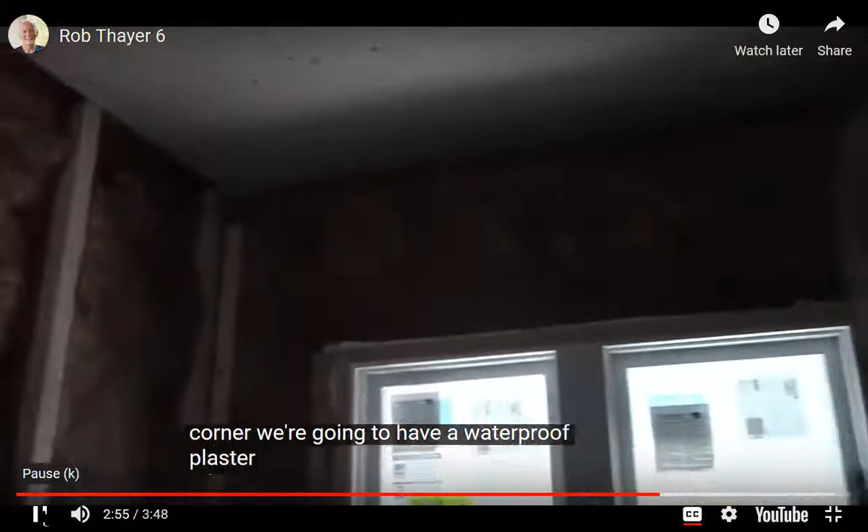Bathroom, this is the MR board. We stopped it here with the metal corner. We're gonna have a waterproof plaster condition in our tub shower. This bathroom, as well as this, is a wall hanging vanity on that wall. It's probably out there. Oh shoot. We're gonna finish that thing off.

Dang. I gotta call John. But I forgot. Anyway, so signing off for drywall for now, okay? Oh wait, I'll take you into the master.

Let's go into the master. Let's look at the bathroom. We gotta get these doors on. Here's the master. They just hung this morning while I was here filming. Clean as a whistle. Wow, super clean. All right, later.

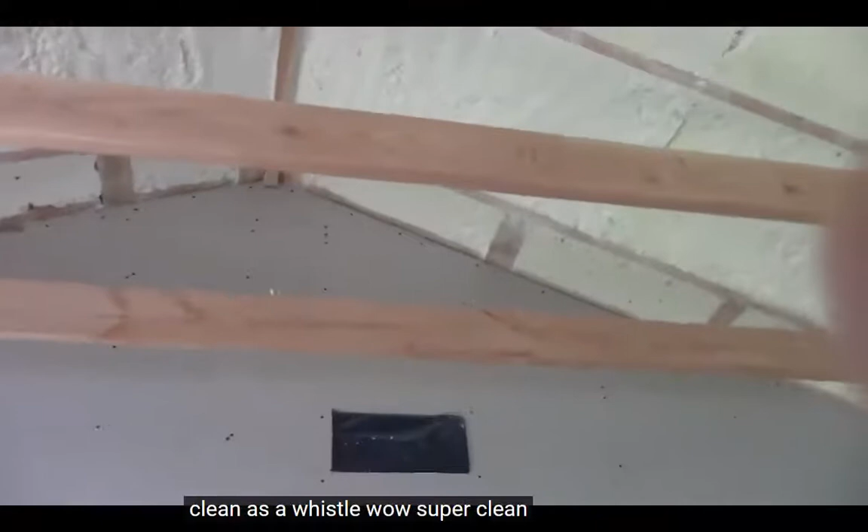I'm recording, right? I hope. Let's see. I'm recording, right? Yeah, I'm recording.

Okay, so does anybody have any questions before I jump into the book a little bit? Yes. Fire away. Okay, so he talked about staggering the joint. Now, to me, it just looked all cut up and square, and you had the joint in like a cross. So what does he mean by staggering the joint? Like how you would lay hardwood flooring or bricks, stagger like that? I'm going to show you. I'm going to illustrate.

A wall, an 8-foot wall, 8 foot tall, right? It's studded every 16 inches. Your board's hanging horizontally. So you're going to hang one board to there, and you can have a butt joint. This is not to scale. Hang one piece of board there, and you're gonna have a butt joint, right? You're gonna hang another piece of board like that.

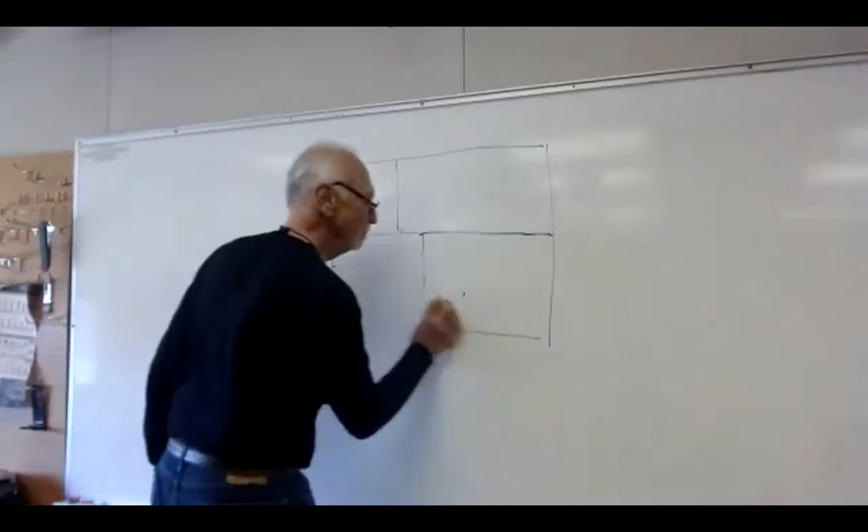Okay. So the kerfing that we were talking about, was that used with tongue and groove, like to make the groove for tongue and groove flooring, maybe? No? No, okay. Cutting a groove is bigger than a kerf. Okay. Basically, a kerf is the thickness of a saw blade. It's what a saw blade leaves on a piece of material. So when we talk about kerfing jambs,

If this is the jamb, right? I want to look down and say, this is the jamb. You're a little bit out of focus. Focusing yet? Sometimes it takes a minute. Come on. Okay, better? Yes? Yeah, that's better. Oh, there you go. You're there. I see it. I'm gonna make it even bigger. Awesome. So if this were a jamb, I hate these things. Gotta throw those away. I'm so sick of them.

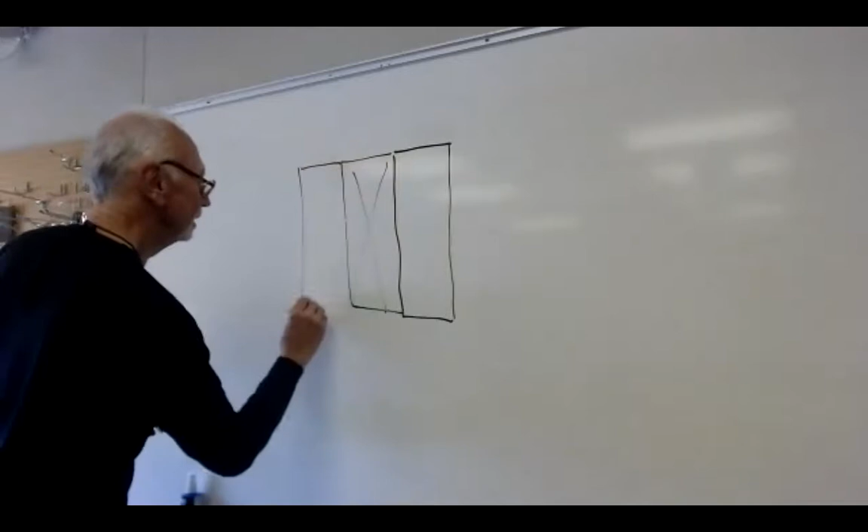Okay, if this is a jamb, a door jamb, in our case it would be married to or nailed to the trimmer stud. So we cut away a wall and we're looking down on it, right? We've tipped it up. And this is the king stud. And then this is a 3.5-inch jamb that the door is going to hang off of. So let's say the door is going to be here. That's the door. It's got butt hinges. There's the knuckle of the butt hinge. There's the stop that the door stops against.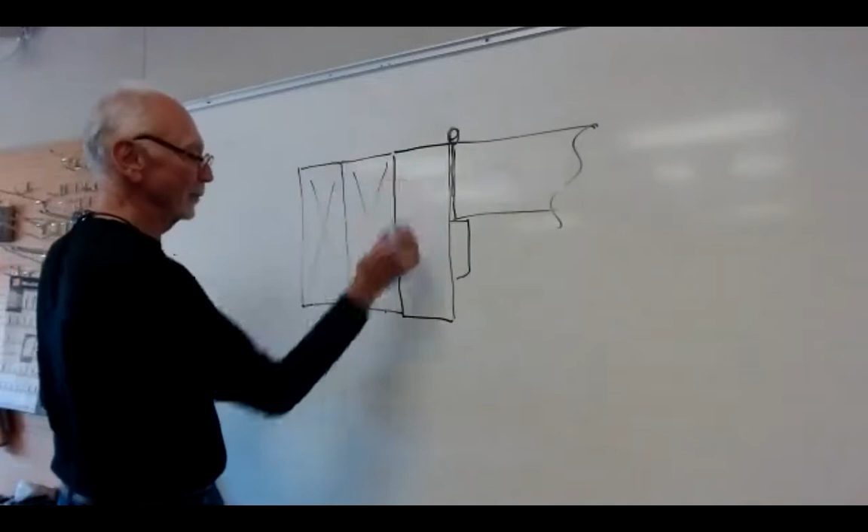So the drywall is going to go on because we've got a 3.5-inch wall, 3.5-inch jamb, because we're going to bullnose it, or we're going to mill core or square corner it. We're going to let the drywall guys trim it out.

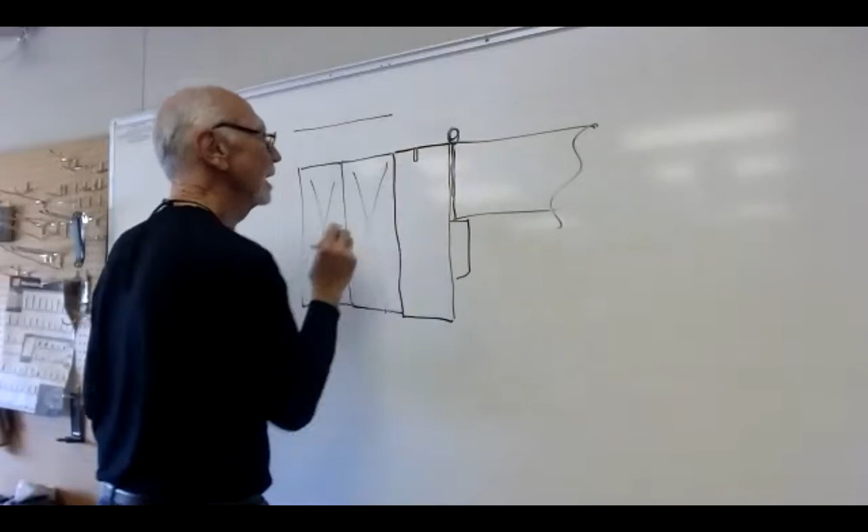Our drywall guys are going to hang drywall, and their square corner is going to tuck in just like that. They're going to expose the whole jamb. Now, if I wanted to, and I may still do it if my doors haven't been hung, I'm going to go in and cut a kerf right at 3/8. You can tilt it wherever you want, but I'll put a 1/16 of an inch cut, just like that, about 3/8 deep, 1/16 inch wide, so a narrow blade kerf, and then that drywall corner is going to tuck into that kerf.

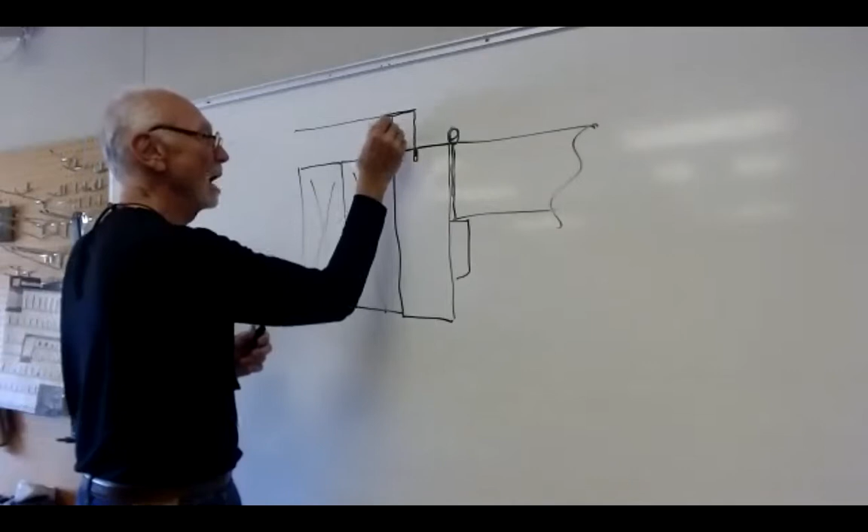So it grounds it and it shows less of the jamb. Now, I'm fine with it grounding behind as well and showing all the jamb, because that's what we've got going on in there. And I actually kind of like the look in this place because it's so minimal. I like seeing more of the window, but that's what a kerf is. And that's the kerf that Rob was talking about.

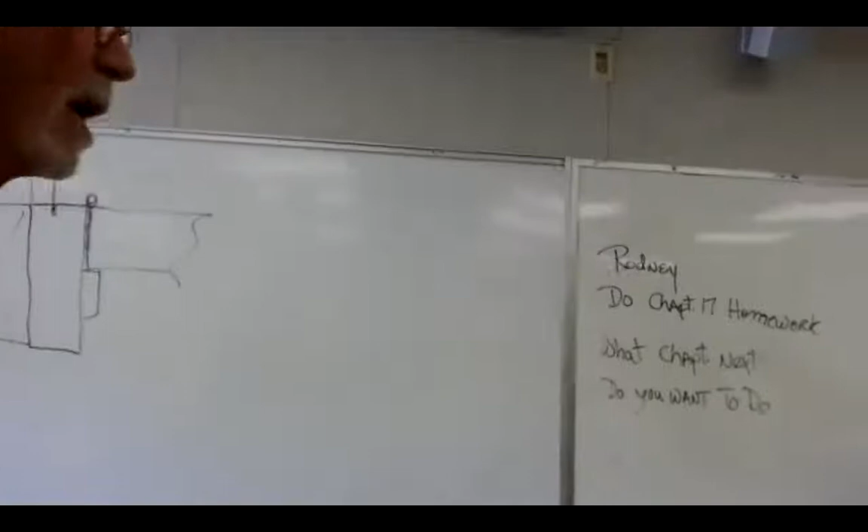Okay, and then you said mill corner? Yeah, mill core. So a bullnose. Yeah, the bullnose is the rounded one, right? Yeah, the bullnose is the rounded one. That's what I have in my house. And this is mill core. Okay, so mill core goes like this, that's just the sharp corner? Mill core. MILCOR. And yes, that's a square corner. That's a corner bead that's square. Mill core may be a brand of it, but over the years it's like Kleenex and tissue.

Right. Okay, any other questions about all that stuff that you saw? You saw a lot of stuff. No, but I was wondering, why are you taking out the windows of the house? Oh. Okay, so Jim and I want to go through this chapter with you, some of the questions in the back for the 10 minutes we got. So I'll tell you next week, because I think we're going to do windows and exterior doors. And then it'll be a really appropriate time for me to talk to you about what's going on with these windows and why I have to take out these 9 windows. It's been kind of consuming me, but now it's happening.

But wouldn't you say, Rodney, that from what Carl says, it's just to make a better estimate so you don't under order your materials? Say that again now. If you just gauge it by the whole wall size, then you make sure you have enough material. So if a board breaks or something, you have enough to cover yourself. Well, yeah, you want to. Carl said 10%. The guys use different multipliers, 10% plus for waste and overage, 15%. Over time you learn what you need to do, but I always like to put in 15%. I would rather have over than not, because most stuff can go back if you keep it intact. And it's a real drag to run out of material and have to go find some when you want to finish a job that day or that afternoon.

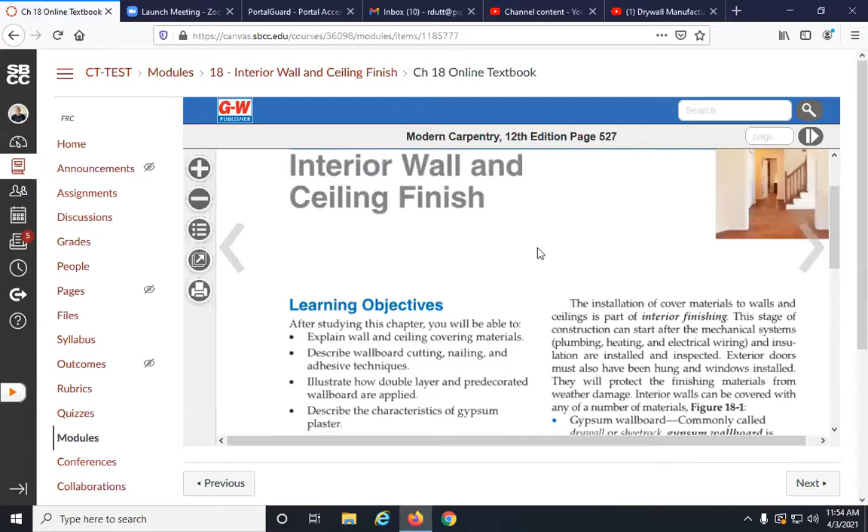Drywall is really incredible, and there are types of drywall. But anyway, I digress. I really do want to show you this. So let's share the screen. So you've all read this, right? You've all read the book.

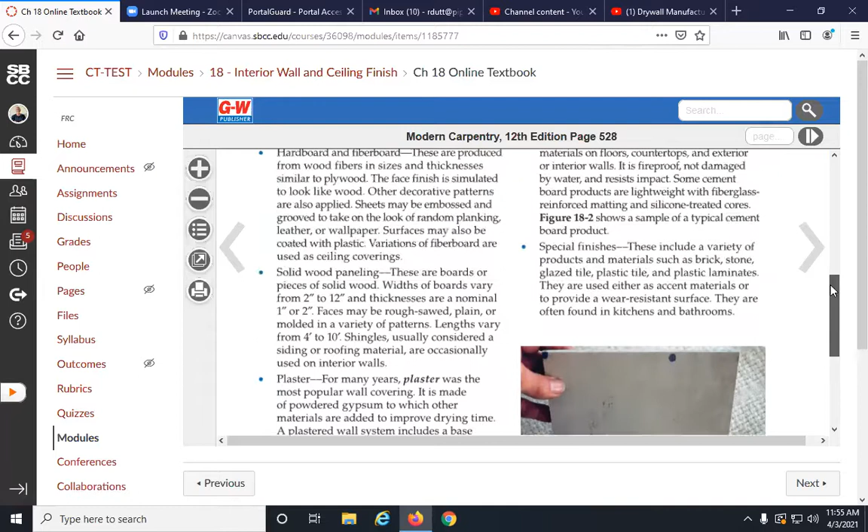Talks about wall finishes, hardboard, fiberboard, solid wood paneling, plaster, cement board. I didn't hear you, what did you say after hardboard? Sorry for interrupting. That's okay. I'm assuming you've all read this chapter, and I was just skimming it. Hardboard and fiberboard, solid wood paneling, plaster. These are all interior wall finishes. We've been talking about drywall, but there are other wall finishes: panelings, plaster. So I'm going to talk a little bit about plaster and caulk. And if anybody asks me next week, because we're going to run out of time, I'll tell you about hardboard and fiberboard, because that's a fairly old-fashioned way of finishing.

And I've done a few houses, and we were going to do our tiny house in a board and batten. And a board and batten interior finish is not a bad way to go. I think we're going to do plywood, 1/2-inch birch or maple plywood as a finish on our tiny house, but that's another story. So the common wall finishes: drywall is the most common. And after that, in that vein, are plaster walls. These days we're not doing plaster the way we used to, which is a full Keene's cement plaster, which is 2-coat plaster on some kind of lath, expanded metal lath, a button board lath.

We don't use wood lath anymore, but the whole idea of plaster over drywall is drywall is multiple coats. The board's hung, and then you've got to tape and mud it, and tape and mud, and then more mud, and then more mud, and then a final coat. So it's about 4 coatings with sandings in between, depending upon how good of a drywall taper you are. The good drywall tapers need less sanding, as Rob spoke to us about.

But a plaster wall is a little harder material. It's not quite as soft as drywall, as a drywall texture. The board it goes on is called Kal-Kore, or blue board, because it's a bright blue paper on it. And it's made to receive Uni-Kal plaster. You can put Uni-Kal plaster on regular drywall, but you have to put a special bonder on the board.

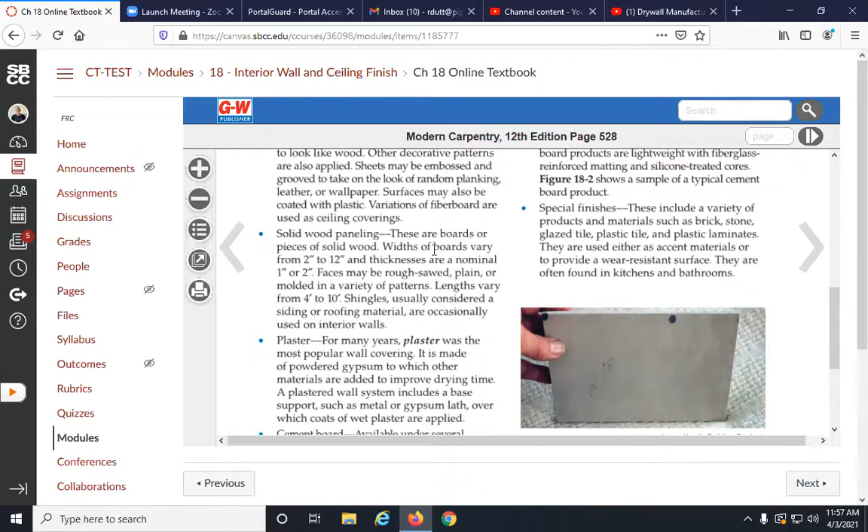So instead of that, you buy Kal-Kore. It hangs just like drywall. It looks like drywall, except for the blue part. It cuts like drywall, but it's made to receive Uni-Kal plaster, which is made to go on at about 1/16 of an inch and cover everything, cover all the joints, the entire wall, all the paper. Once you get done plastering the wall from, say, left to right with Uni-Kal plaster, then you're done. A light sanding, and then you can prime it and paint it. And all this stuff gets primed and painted.

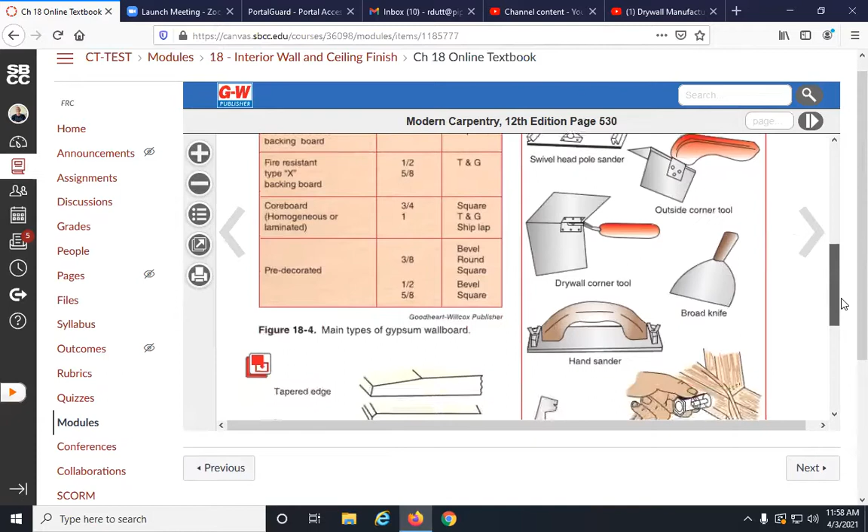So let's just see what we got here. We got drywall construction, which we talked a lot about, or saw a lot about. And here's a bunch of tools, right? The corner tool, the outside corner tool, the pole sander. You know, these guys don't do as much sanding. I've seen a lot of drywall work. I've had a lot of drywall work done for me. And these guys sand very little. And I think it's because they're so good.

And as Rob pointed out, the better you are with a drywall trowel... By the way, this is an 8-inch mud knife. That and a tray is what you'd see drywall guys using on the wall, feathering out on either side of a joint. And I'm telling you, when I say artistes, you watch these guys work these knives, they're just unbelievably good at it. Unbelievably good.

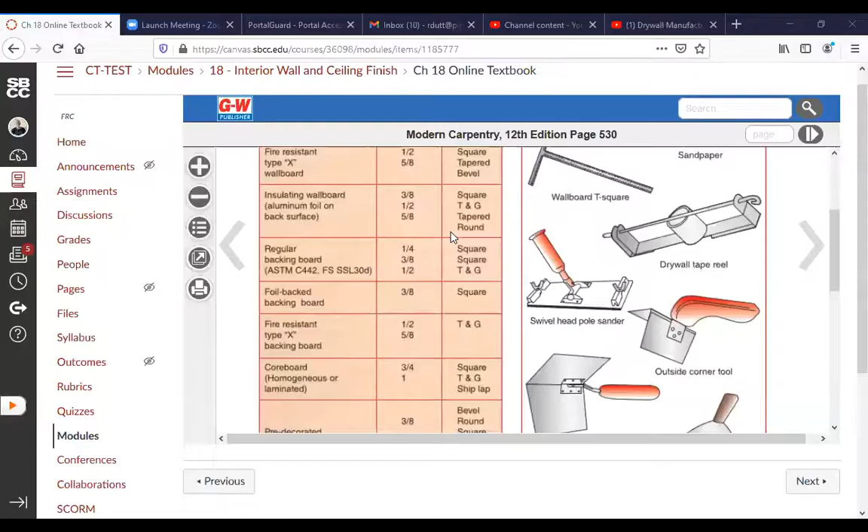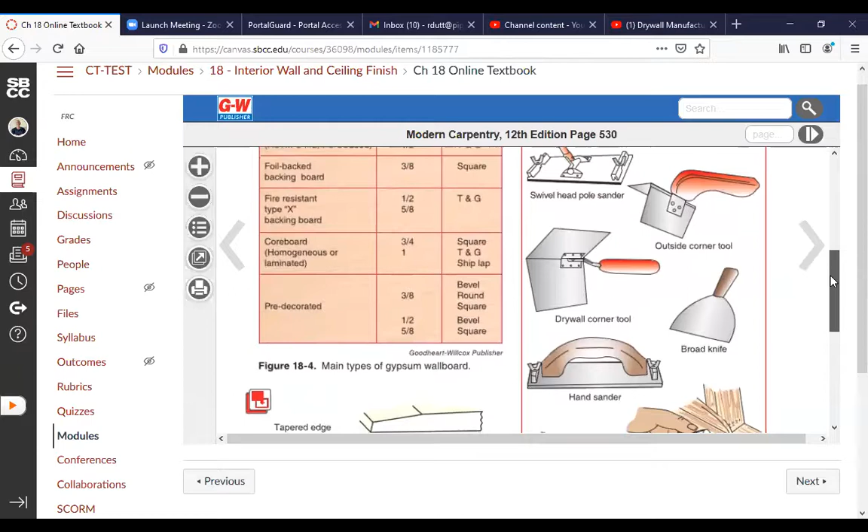So they're talking about the different Type X boards, and there's insulating board, which has got aluminum foil on the back surface, which I don't know how much insulation that really does. That's kind of questionable. There's pre-decorated boards, vinyl wrapped boards, pre-finished boards. They have a hanging system. They're made of gypsum, but they have a finish on them, so they're more like a wall panel. They have to be hung blind or with finish nails and stuff like that.

But there's a typical drywall hammer, which most of these guys do not use. Drywall is screwed off, but typically it's tacked with a hammer and nails just to get it to hang and then screwed off. But these days, with cordless screw guns and magnetic screw holders so efficient, these guys screw off everything. They very rarely hammer anything, but they still do hammer stuff.

A couple of things I wanted to illustrate about drywall. I know we're totally out of time, but I want to illustrate something to you on the board. There are two aspects of drywall. One is if you're doing drywall for yourself, it's probably a good idea to use some drywall nails to hang it and then screw it off. It's a little bit easier than having to wield a screw gun just to get it hanging on the wall.

But the thing that's kind of cool to know is that drywall nails are cupped. They have a cup. You look at them, they have a cup, so that when they go down, they have a place to receive the drywall mud.

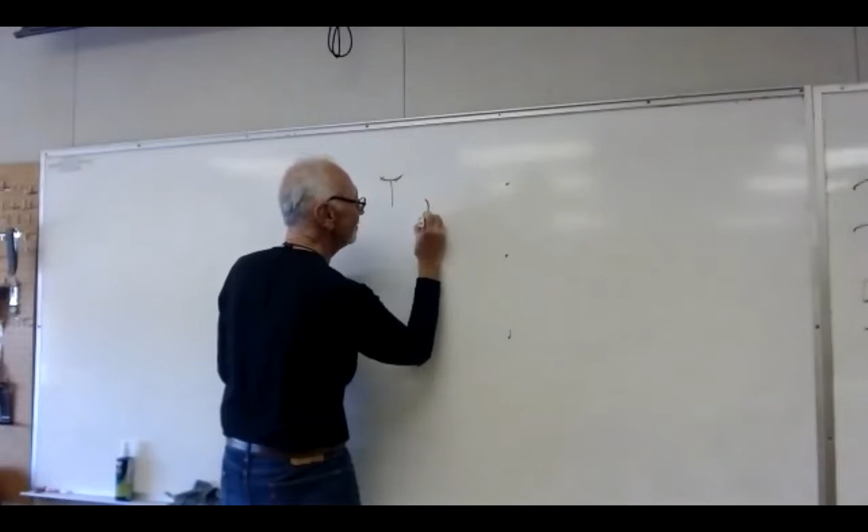Because if you noticed when we were looking at that, you had all those little dots on the board, right? Those get mud on them and they disappear. But those are screws or nails. The nails have that cup. A drywall hammer, that hammer that you just saw an illustration of, it has a convex head, side view of it. It's a rounded head. So it actually dimples.

If you use a drywall hammer right, you drive that cup-headed nail into the board, and you don't penetrate the paper. In other words, you don't cut the paper, but your cupped drywall hammer head has also got some waffling on it. So it indents the gypsum, it indents the paper, it makes an indentation that's made to take drywall mud, and then it scores the paper a little bit so that the drywall mud has something to grab onto, just like the lath serves for stucco, you know, the stucco lath.

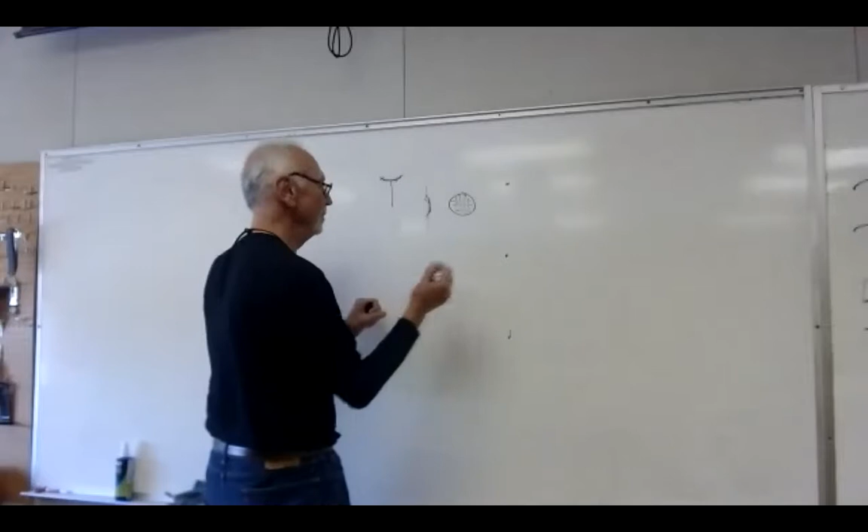The same principle. And then the other thing I wanted to illustrate is that is a piece of board on the 4-foot side on end. If you look, the back's perfectly straight. That's the part that goes on your wall, straight as an arrow, right? It nails to the stud. But up here on this edge, it tapers like that for about 1 inch plus. And same thing down at this end, it tapers.

So that way, if you didn't get what Rob was saying, when that next piece of board goes on top, it's got a taper as well. So that's that recess, and I've exaggerated it, but that's the recess that gets the mud and mesh tape, and it allows that mud to go on and fill that joint and not project out and be a hump on the drywall. It stays pretty flat, and then they pull it in both directions and feather it out.

Okay, so that was pretty comprehensive drywall stuff. I don't know if I'll take the time to write some questions maybe later. I got a bunch of great questions to ask you, including how do you figure Easter?